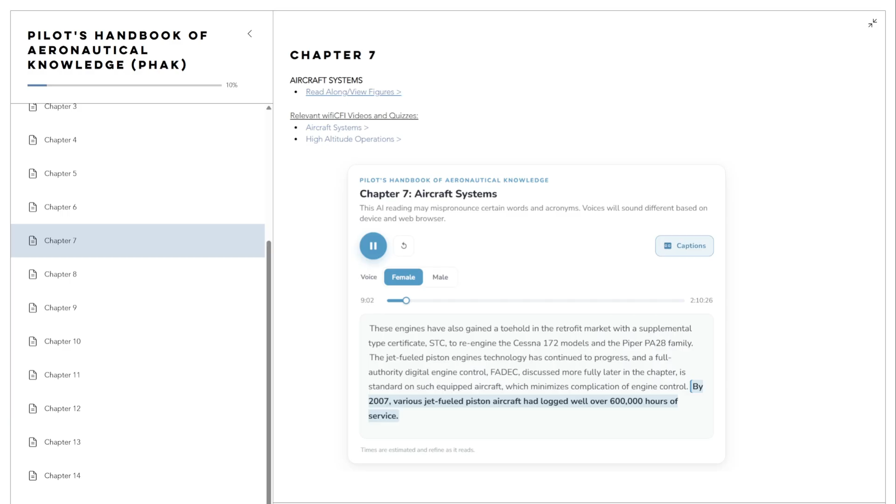Propeller. The propeller is a rotating airfoil, subject to induced drag, stalls, and other aerodynamic principles that apply to any airfoil. It provides the necessary thrust to pull, or in some cases push, the aircraft through the air. The engine power is used to rotate the propeller, which in turn generates thrust very similar to the manner in which a wing produces lift. The amount of thrust produced depends on the shape of the airfoil, the angle of attack, AOA, of the propeller blade, and the revolutions per minute, RPM, of the engine.

The propeller itself is twisted so the blade angle changes from hub to tip. The greatest angle of incidence, or the highest pitch, is at the hub, while the smallest angle of incidence, or smallest pitch, is at the tip. The reason for the twist is to produce uniform lift from the hub to the tip. As the blade rotates, there is a difference in the actual speed of the various portions of the blade. The tip of the blade travels faster than the part near the hub, because the tip travels a greater distance than the hub in the same length of time. Figure 7-7, changing the angle of incidence, pitch, from the hub to the tip to correspond with the speed produces uniform lift throughout the length of the blade.

A propeller blade designed with the same angle of incidence throughout its entire length would be inefficient, because as airspeed increases in flight, the portion near the hub would have a negative AOA, while the blade tip would be stalled. Small aircraft are equipped with either one of two types of propellers, fixed pitch or adjustable pitch.

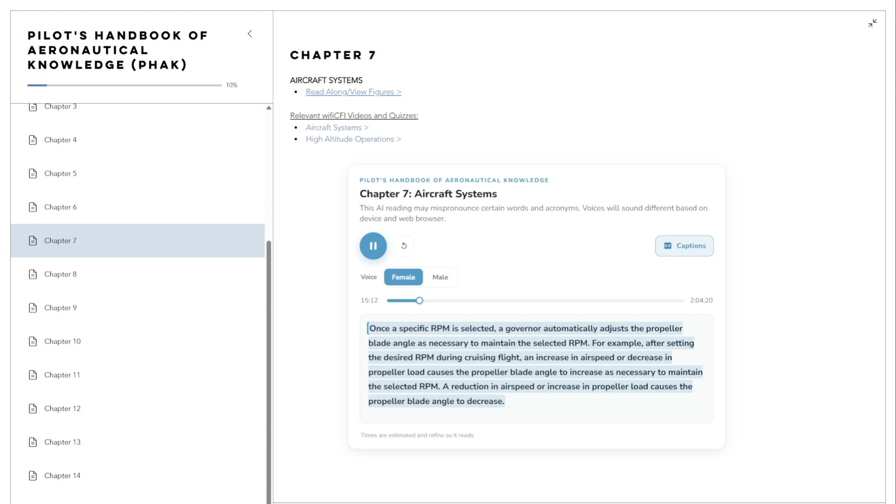The throttle controls power output and the propeller control regulates engine RPM. This regulates propeller RPM, which is registered on the tachometer. Once a specific RPM is selected, a governor automatically adjusts the propeller blade angle as necessary to maintain the selected RPM. For example, after setting the desired RPM during cruising flight, an increase in airspeed or decrease in propeller load causes the propeller blade angle to increase as necessary to maintain the selected RPM. A reduction in airspeed or increase in propeller load causes the propeller blade angle to decrease.

The propeller's constant speed range, defined by the high and low pitch stops, is the range of possible blade angles for a constant speed propeller. As long as the propeller blade angle is within the constant speed range and not against either pitch stop, a constant engine RPM is maintained.

If the propeller blades contact a pitch stop, the engine RPM will increase or decrease as appropriate with changes in airspeed and propeller load. For example, once a specific RPM has been selected, if aircraft speed decreases enough to rotate the propeller blades until they contact the low pitch stop, any further decrease in airspeed will cause engine RPM to decrease the same way as if a fixed pitch propeller were installed.

The same holds true when an aircraft equipped with a constant speed propeller accelerates to a faster airspeed. As the aircraft accelerates, the propeller blade angle increases to maintain the selected RPM until the high pitch stop is reached. Once this occurs, the blade angle cannot increase any further and engine RPM increases.

On aircraft equipped with a constant speed propeller, power output is controlled by the throttle and indicated by a manifold pressure gauge. The gauge measures the absolute pressure of the fuel-air mixture inside the intake manifold and is more correctly a measure of manifold absolute pressure (MAP). At a constant RPM and altitude, the amount of power produced is directly related to the fuel-air mixture being delivered to the combustion chamber. As the throttle setting is increased, more fuel and air flows to the engine and MAP increases.

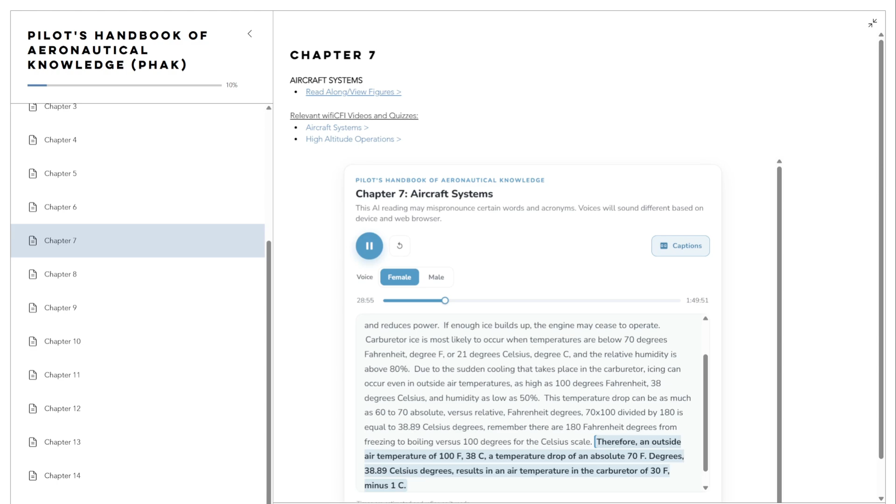This temperature drop can be as much as 60 to 70 absolute, versus relative, Fahrenheit degrees. 70 × 100 / 180 = 38.89 Celsius degrees. Remember there are 180 Fahrenheit degrees from freezing to boiling versus 100 degrees for the Celsius scale. Therefore, an outside air temperature of 100 °F (38 °C) with a temperature drop of an absolute 70 F degrees (38.89 Celsius degrees) results in an air temperature in the carburetor of 30 °F (-1 °C).

The first indication of carburetor icing in an aircraft with a fixed-pitch propeller is a decrease in engine RPM, which may be followed by engine roughness. In an aircraft with a constant speed propeller, carburetor icing is usually indicated by a decrease in manifold pressure, but no reduction in RPM. Propeller pitch is automatically adjusted to compensate for loss of power. Thus, a constant RPM is maintained.

Although carburetor ice can occur during any phase of flight, it is particularly dangerous when using reduced power during a descent. Under certain conditions, carburetor ice could build unnoticed until power is added. To combat the effects of carburetor ice, engines with float-type carburetors employ a carburetor heat system. Carburetor heat.

Carburetor heat is an anti-icing system that preheats the air before it reaches the carburetor and is intended to keep the fuel-air mixture above freezing to prevent the formation of carburetor ice. Carburetor heat can be used to melt ice that has already formed in the carburetor if the accumulation is not too great, but using carburetor heat as a preventative measure is the better option.

Additionally, carburetor heat may be used as an alternate air source if the intake filter clogs, such as in sudden or unexpected airframe icing conditions. The carburetor heat should be checked during the engine run-up. When using carburetor heat, follow the manufacturer's recommendations.

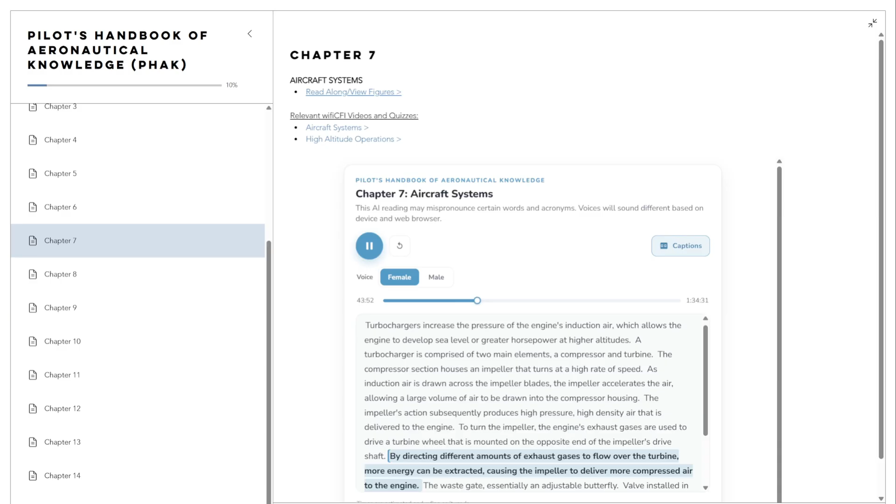To turn the impeller, the engine's exhaust gases are used to drive a turbine wheel that is mounted on the opposite end of the impeller's drive shaft. By directing different amounts of exhaust gases to flow over the turbine, more energy can be extracted, causing the impeller to deliver more compressed air to the engine. The wastegate, essentially an adjustable butterfly valve installed in the exhaust system, is used to vary the mass of exhaust gas flowing into the turbine. When closed, most of the exhaust gases from the engine are forced to flow through the turbine. When open, the exhaust gases are allowed to bypass the turbine by flowing directly out through the engine's exhaust pipe.

Since the temperature of a gas rises when it is compressed, turbocharging causes the temperature of the induction air to increase. To reduce this temperature and lower the risk of detonation, many turbocharged engines use an intercooler. This small heat exchanger uses outside air to cool the hot compressed air before it enters the fuel metering device. System operation. On most modern turbocharged engines, the position of the wastegate is governed by a pressure sensing control mechanism coupled to an actuator.

Engine oil directed into or away from this actuator moves the wastegate position. On these systems, the actuator is automatically positioned to produce the desired MAP simply by changing the position of the throttle control. Other turbocharging system designs use a separate manual control to position the wastegate. With manual control, the manifold pressure gauge must be closely monitored to determine when the desired MAP has been achieved.

Manual systems are often found on aircraft that have been modified with aftermarket turbocharging systems. These systems require special operating considerations. For example, if the wastegate is left closed after descending from a high altitude, it is possible to produce a manifold pressure that exceeds the engine's limitations. This condition, called an overboost, may produce severe detonation because of the leaning effect resulting from increased air density during descent. Although an automatic wastegate system is less likely to experience an overboost condition, it can still occur.

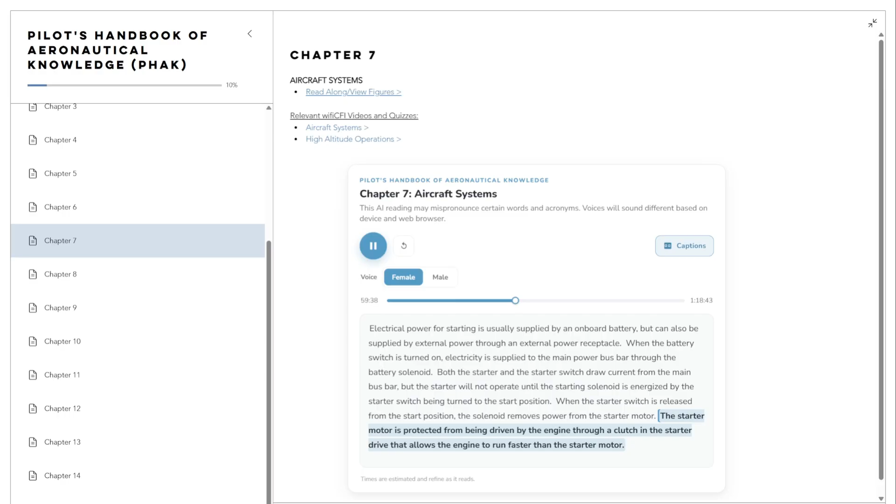When the starter switch is released from the start position, the solenoid removes power from the starter motor. The starter motor is protected from being driven by the engine through a clutch in the starter drive that allows the engine to run faster than the starter motor.

When starting an engine, the rules of safety and courtesy should be strictly observed. One of the most important safety rules is to ensure there is no one near the propeller prior to starting the engine. In addition, the wheels should be chocked and the brakes set to avoid hazards caused by unintentional movement. To avoid damage to the propeller and property, the aircraft should be in an area where the propeller will not stir up gravel or dust.

Combustion. During normal combustion, the fuel-air mixture burns in a very controlled and predictable manner. In a spark ignition engine, the process occurs in a fraction of a second. The mixture actually begins to burn at the point where it is ignited by the spark plugs. It then burns away from the plugs until it is completely consumed. This type of combustion causes a smooth buildup of temperature and pressure and ensures that the expanding gases deliver the maximum force to the piston at exactly the right time in the power stroke.

Figure 7-21. Detonation is an uncontrolled, explosive ignition of the fuel-air mixture within the cylinder's combustion chamber. It causes excessive temperatures and pressures which, if not corrected, can quickly lead to failure of the piston, cylinder, or valves. In less severe cases, detonation causes engine overheating, roughness, or loss of power. Detonation is characterized by high cylinder head temperatures and is most likely to occur when operating at high power settings.

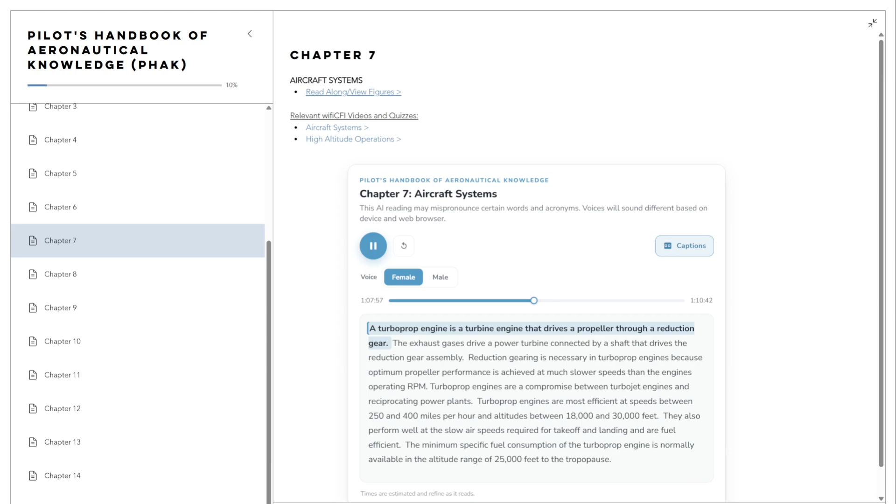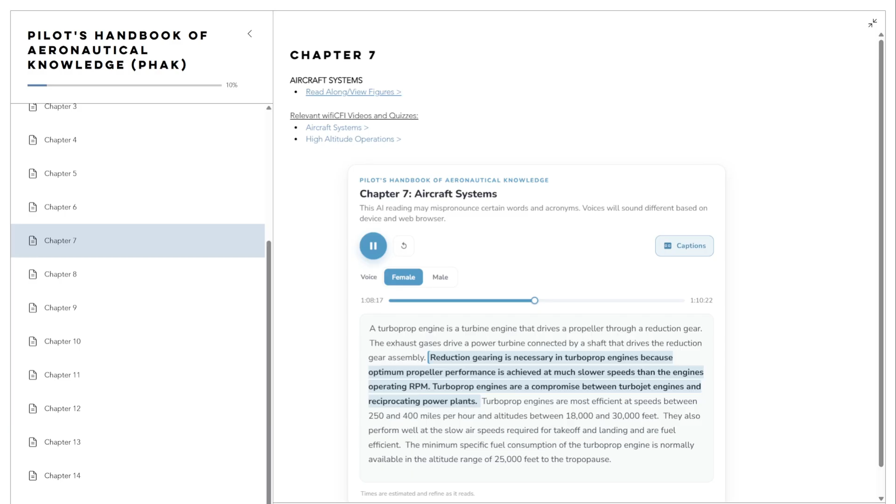Turboprop. A turboprop engine is a turbine engine that drives a propeller through a reduction gear. The exhaust gases drive a power turbine connected by a shaft that drives the reduction gear assembly. Reduction gearing is necessary in turboprop engines because optimum propeller performance is achieved at much slower speeds than the engine's operating RPM. Turboprop engines are a compromise between turbojet engines and reciprocating power plants.

Turboprop engines are most efficient at speeds between 250 and 400 miles per hour and altitudes between 18,000 and 30,000 feet. They also perform well at the slow air speeds required for takeoff and landing and are fuel efficient. The minimum specific fuel consumption of the turboprop engine is normally available in the altitude range of 25,000 feet to the tropopause.

Turbofan. Turbofans were developed to combine some of the best features of the turbojet and the turboprop. Turbofan engines are designed to create additional thrust by diverting a secondary airflow around the combustion chamber. The turbofan bypass air generates increased thrust, cools the engine, and aids in exhaust noise suppression. This provides turbojet-type cruise speed and lower fuel consumption.

The inlet air that passes through a turbofan engine is usually divided into 2 separate streams of air. One stream passes through the engine core, while a second stream bypasses the engine core. It is this bypass stream of air that is responsible for the term bypass engine. A turbofan's bypass ratio refers to the ratio of the mass airflow that passes through the fan divided by the mass airflow that passes through the engine core.

Turboshaft. The fourth common type of jet engine is the turboshaft. As shown in Figure 7-26, it delivers power to a shaft that drives something other than a propeller.

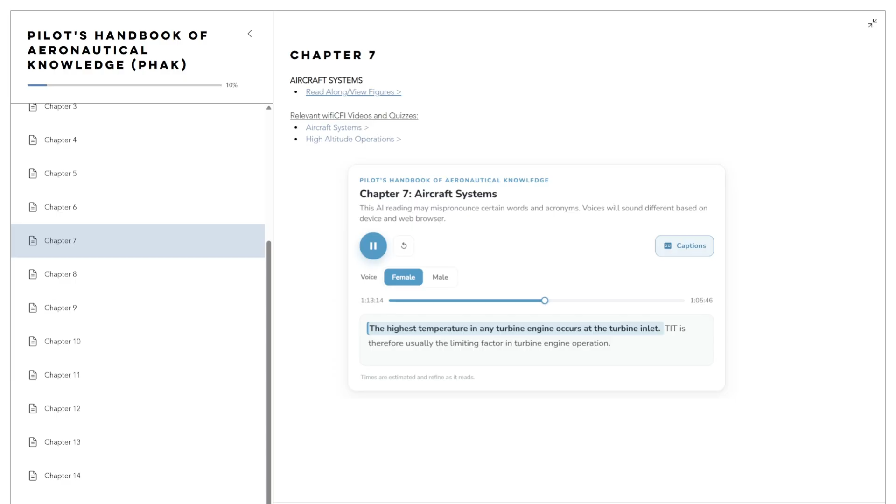Engine temperature limitations. The highest temperature in any turbine engine occurs at the turbine inlet. TIT is therefore usually the limiting factor in turbine engine operation. Turbine engine thrust varies directly with air density. As air density decreases, so does thrust. Additionally, because air density decreases with an increase in temperature, increased temperatures also result in decreased thrust. While both turbine and reciprocating powered engines are affected to some degree by high relative humidity, turbine engines will experience a negligible loss of thrust, while reciprocating engines experience a significant loss of brake horsepower.

Foreign object damage, FOD. Due to the design and function of a turbine engine's air inlet, the possibility of ingestion of debris always exists. This causes significant damage, particularly to the compressor and turbine sections. When ingestion of debris occurs, it is called foreign object damage, FOD. Typical FOD consists of small nicks and dents caused by ingestion of small objects from the ramp, taxiway, or runway, but FOD damage caused by bird strikes or ice ingestion also occurs. Sometimes FOD results in total destruction of an engine.

Prevention of FOD is a high priority. Some engine inlets have a tendency to form a vortex between the ground and the inlet during ground operations. A vortex dissipator may be installed on these engines. Other devices, such as screens and/or deflectors, may also be utilized. Pre-flight procedures include a visual inspection for any sign of FOD.

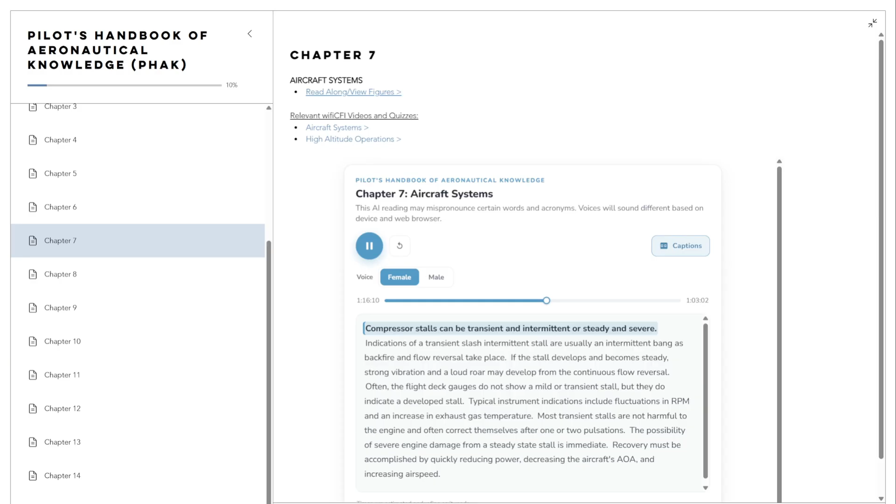Compressor stalls can be transient and intermittent or steady and severe. Indications of a transient/intermittent stall are usually an intermittent bang as backfire and flow reversal take place. If the stall develops and becomes steady, strong vibration and a loud roar may develop from the continuous flow reversal.

Often, the flight deck gauges do not show a mild or transient stall, but they do indicate a developed stall. Typical instrument indications include fluctuations in RPM and an increase in exhaust gas temperature. Most transient stalls are not harmful to the engine and often correct themselves after 1 or 2 pulsations.

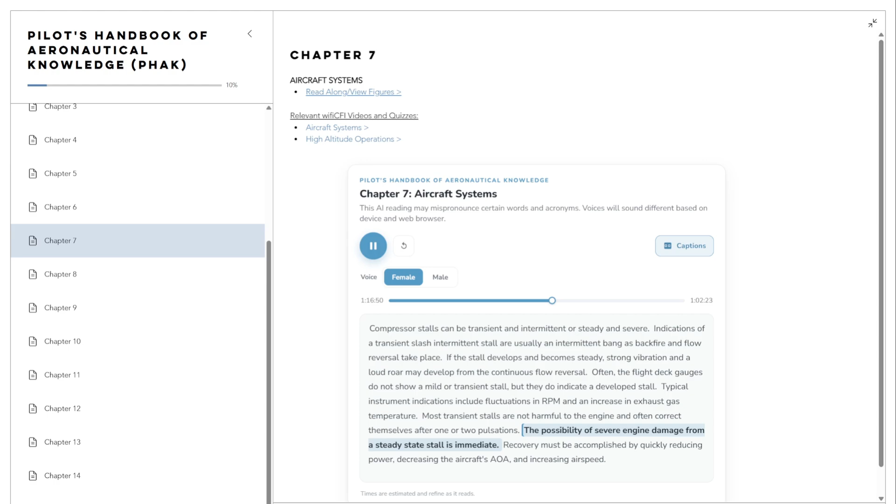The possibility of severe engine damage from a steady-state stall is immediate. Recovery must be accomplished by quickly reducing power, decreasing the aircraft's AOA, and increasing airspeed. Although all gas turbine engines are subject to compressor stalls, most models have systems that inhibit them.

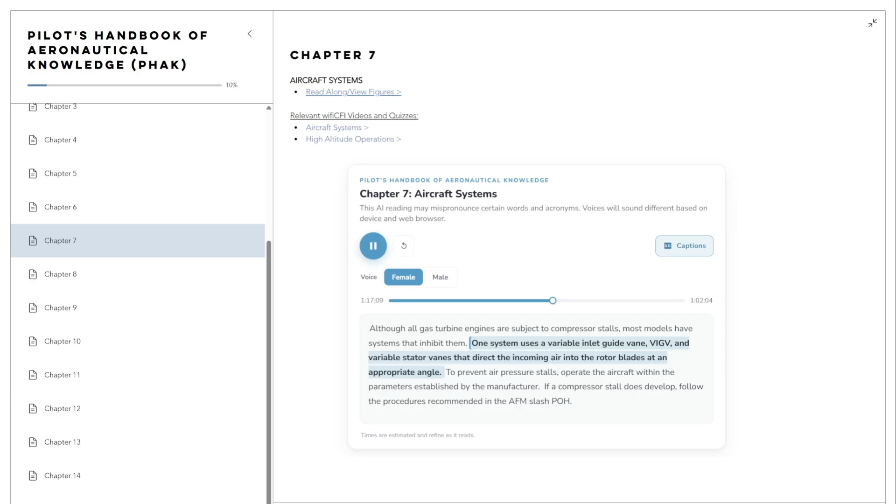One system uses a variable inlet guide vane, VIGV, and variable stator vanes that direct the incoming air into the rotor blades at an appropriate angle. To prevent air pressure stalls, operate the aircraft within the parameters established by the manufacturer. If a compressor stall does develop, follow the procedures recommended in the AFM/POH.

Flameout. A flameout occurs in the operation of a gas turbine engine, in which the fire in the engine unintentionally goes out. If the rich limit of the fuel-air ratio is exceeded in the combustion chamber, the flame will blow out. This condition is often referred to as a rich flameout. It generally results from very fast engine acceleration, where an overly rich mixture causes the fuel temperature to drop below the combustion temperature. It may also be caused by insufficient airflow to support combustion.

A more common flameout occurrence is due to low fuel pressure and low engine speeds, which typically are associated with high-altitude flight. This situation may also occur with the engine throttled back during a descent, which can set up the lean condition flameout. A weak mixture can easily cause the flame to die out, even with a normal airflow through the engine. Any interruption of the fuel supply can result in a flameout. This may be due to prolonged unusual attitudes, a malfunctioning fuel control system, turbulence, icing, or running out of fuel.

Symptoms of a flameout normally are the same as those following an engine failure. If the flameout is due to a transitory condition, such as an imbalance between fuel flow and engine speed, an air start may be attempted once the condition is corrected. In any case, pilots must follow the applicable emergency procedures outlined in the AFM/POH. Generally, these procedures contain recommendations concerning altitude and airspeed, where the air start is most likely to be successful.

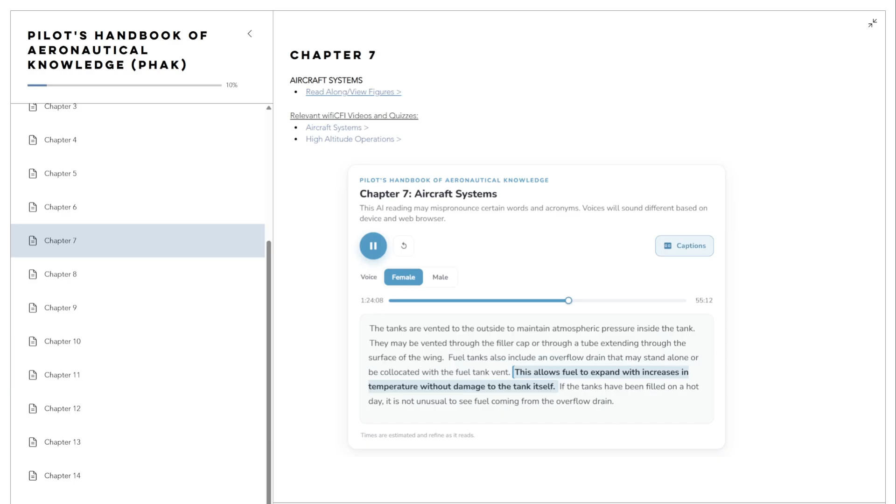Fuel tanks. The fuel tanks, normally located inside the wings of an airplane, have a filler opening on top of the wing through which they can be filled. A filler cap covers this opening. The tanks are vented to the outside to maintain atmospheric pressure inside the tank. They may be vented through the filler cap or through a tube extending through the surface of the wing. Fuel tanks also include an overflow drain that may stand alone or be collocated with the fuel tank vent. This allows fuel to expand with increases in temperature without damage to the tank itself. If the tanks have been filled on a hot day, it is not unusual to see fuel coming from the overflow drain.

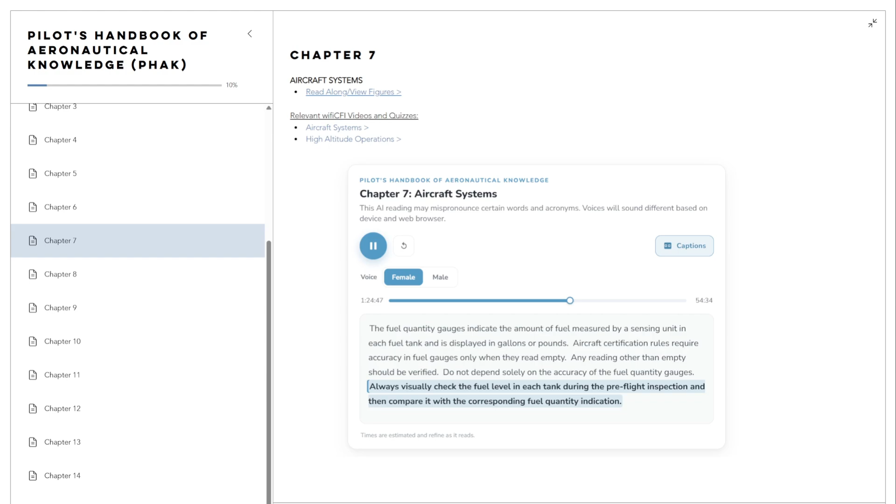Fuel gauges. The fuel quantity gauges indicate the amount of fuel measured by a sensing unit in each fuel tank and is displayed in gallons or pounds. Aircraft certification rules require accuracy in fuel gauges only when they read empty. Any reading other than empty should be verified. Do not depend solely on the accuracy of the fuel quantity gauges. Always visually check the fuel level in each tank during the pre-flight inspection and then compare it with the corresponding fuel quantity indication. If a fuel pump is installed in the fuel system, a fuel pressure gauge is also included.

This gauge indicates the pressure in the fuel lines. The normal operating pressure can be found in the AFM/POH or on the gauge by color coding.

Fuel selectors. The fuel selector valve allows selection of fuel from various tanks. A common type of selector valve contains 4 positions: left, right, both, and off. Selecting the left or right position allows fuel to feed only from the respective tank, while selecting the both position feeds fuel from both tanks. The left or right position may be used to balance the amount of fuel remaining in each wing tank.

Fuel placards show any limitations on fuel tank usage, such as level flight only and/or both for landings and takeoffs. Regardless of the type of fuel selector in use, fuel consumption should be monitored closely to ensure that a tank does not run completely out of fuel. Running a fuel tank dry does not only cause the engine to stop, but running for prolonged periods on one tank causes an unbalanced fuel load between tanks.

Running a tank completely dry may allow air to enter the fuel system and cause vapor lock, which makes it difficult to restart the engine. On fuel-injected engines, the fuel becomes so hot it vaporizes in the fuel line, not allowing fuel to reach the cylinders.

Fuel strainers, sumps, and drains. After leaving the fuel tank and before it enters the carburetor, the fuel passes through a strainer that removes any moisture and other sediments in the system. Since these contaminants are heavier than aviation fuel, they settle in a sump at the bottom of the strainer assembly. A sump is a low point in a fuel system and/or fuel tank. The fuel system may contain a sump, a fuel strainer, and fuel tank drains, which may be collocated.

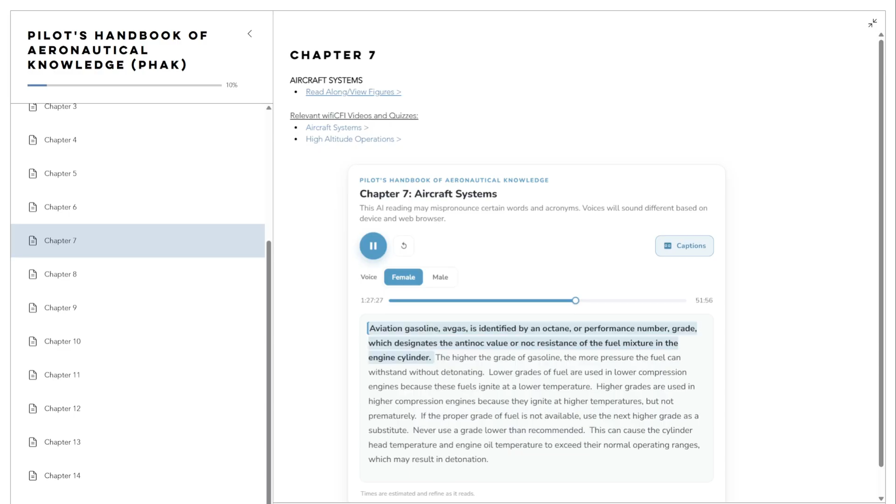Fuel grades. Aviation gasoline, avgas, is identified by an octane, or performance number, grade, which designates the anti-knock value or knock resistance of the fuel mixture in the engine cylinder. The higher the grade of gasoline, the more pressure the fuel can withstand without detonating. Lower grades of fuel are used in lower compression engines because these fuels ignite at a lower temperature. Higher grades are used in higher compression engines because they ignite at higher temperatures, but not prematurely.

If the proper grade of fuel is not available, use the next higher grade as a substitute. Never use a grade lower than recommended. This can cause the cylinder head temperature and engine oil temperature to exceed their normal operating ranges, which may result in detonation. Several grades of avgas are available. Care must be exercised to ensure that the correct aviation grade is being used for the specific type of engine. The proper fuel grade is stated in the AFM/POH, on placards in the flight deck, and next to the filler caps.

Automobile gas should never be used in aircraft engines unless the aircraft has been modified with a Supplemental Type Certificate, STC, issued by the Federal Aviation Administration, FAA. The current method identifies avgas for aircraft with reciprocating engines by the octane and performance number, along with the abbreviation avgas. These aircraft use avgas 80, 100, and 100LL. Although avgas 100LL performs the same as grade 100, the LL indicates it has a low lead content.

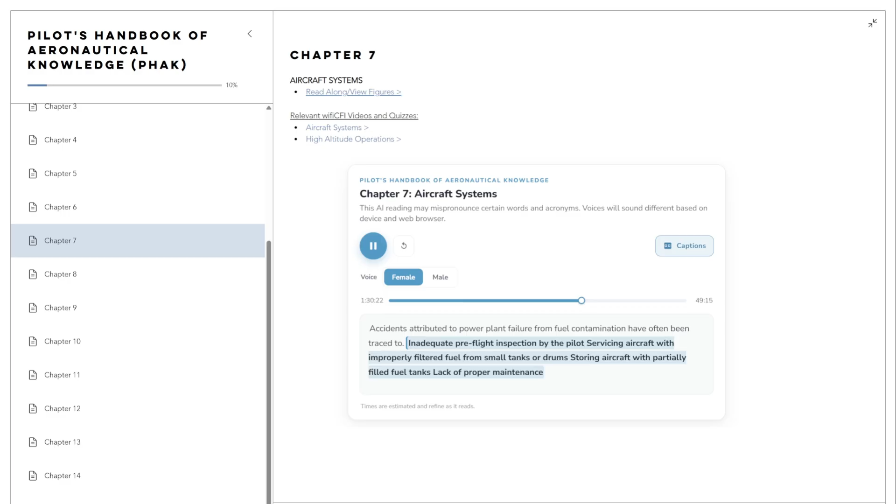Fuel contamination. Accidents attributed to power plant failure from fuel contamination have often been traced to inadequate pre-flight inspection by the pilots, servicing aircraft with improperly filtered fuel from small tanks or drums, storing aircraft with partially filled fuel tanks, and lack of proper maintenance. Fuel should be drained from the fuel strainer quick drain and from each fuel tank sump into a transparent container and then checked for dirt and water.

When the fuel strainer is being drained, water in the tank may not appear until all the fuel has been drained from the lines leading to the tank. This indicates that water remains in the tank and is not forcing the fuel out of the fuel lines leading to the fuel strainer. Therefore, drain enough fuel from the fuel strainer to be certain that fuel is being drained from the tank. The amount depends on the length of fuel line from the tank to the drain. If water or other contaminants are found in the first sample, drain further samples until no trace appears.

Water may also remain in the fuel tanks after the drainage from the fuel strainer has ceased to show any trace of water. This residual water can be removed only by draining the fuel tank sump drains. Water is the principal fuel contaminant. Suspended water droplets in the fuel can be identified by a cloudy appearance of the fuel or by the clear separation of water from the colored fuel, which occurs after the water has settled to the bottom of the tank. As a safety measure, the fuel sump should be drained before every flight during the pre-flight inspection.

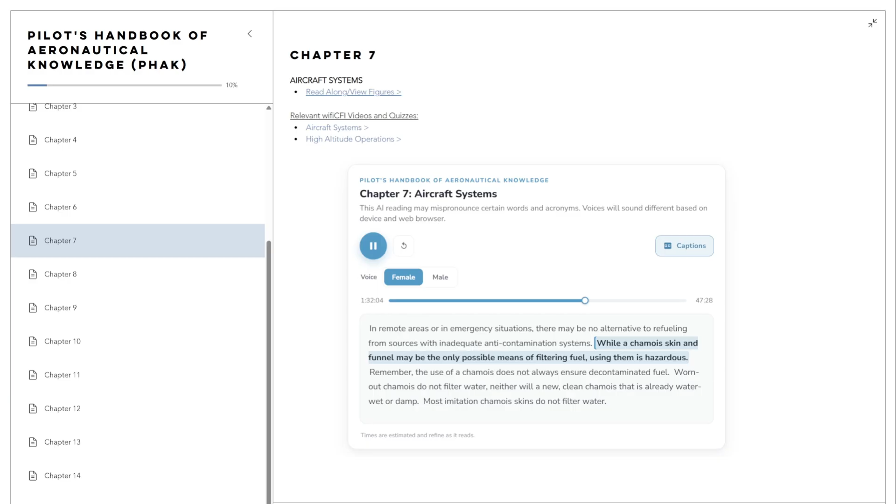Fuel tanks should be filled after each flight or after the last flight of the day to prevent moisture condensation within the tank. To prevent fuel contamination, avoid refueling from cans and drums. In remote areas or in emergency situations, there may be no alternative to refueling from sources with inadequate anti-contamination systems. While a chamois skin and funnel may be the only possible means of filtering fuel, using them is hazardous. Remember, the use of a chamois does not always ensure decontaminated fuel. Worn-out chamois do not filter water, neither will a new, clean chamois that is already water-wet or damp. Most imitation chamois skins do not filter water.

Fuel system icing. Ice formation in the aircraft fuel system results from the presence of water in the fuel system. This water may be undissolved or dissolved. One condition of undissolved water is entrained water that consists of minute water particles suspended in the fuel. This may occur as a result of mechanical agitation of free water or conversion of dissolved water through temperature reduction. Entrained water settles out in time under static conditions and may or may not be drained during normal servicing, depending on the rate at which it is converted to free water. In general, it is not likely that all entrained water can ever be separated from fuel under field conditions.

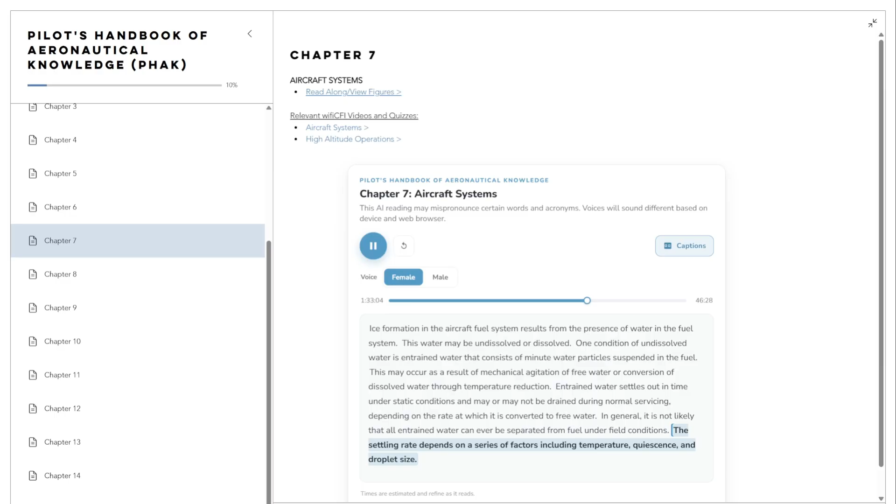The settling rate depends on a series of factors including temperature, quiescence, and droplet size. The droplet size varies depending upon the mechanics of formation. Usually, the particles are so small as to be invisible to the naked eye, but in extreme cases, can cause slight haziness in the fuel. Water in solution cannot be removed except by dehydration or by converting it through temperature reduction to entrained, then to free water. Another condition of undissolved water is free water that may be introduced as a result of refueling or the settling of entrained water that collects at the bottom of a fuel tank.

Free water is usually present in easily detected quantities at the bottom of the tank, separated by a continuous interface from the fuel above. Free water can be drained from a fuel tank through the sump drains, which are provided for that purpose. Free water, frozen on the bottom of reservoirs, such as the fuel tanks and fuel filter, may render water drains useless and can later melt, releasing the water into the system, thereby causing engine malfunction or stoppage. If such a condition is detected, the aircraft may be placed in a warm hangar to re-establish proper draining of these reservoirs, and all sumps and drains should be activated and checked prior to flight.

Entrained water, i.e., water in solution with petroleum fuels, constitutes a relatively small part of the total potential water in a particular system, the quantity dissolved being dependent on fuel temperature and the existing pressure and the water solubility characteristics of the fuel. Entrained water freezes in mid-fuel and tends to stay in suspension longer since the specific gravity of ice is approximately the same as that of AVGAS.

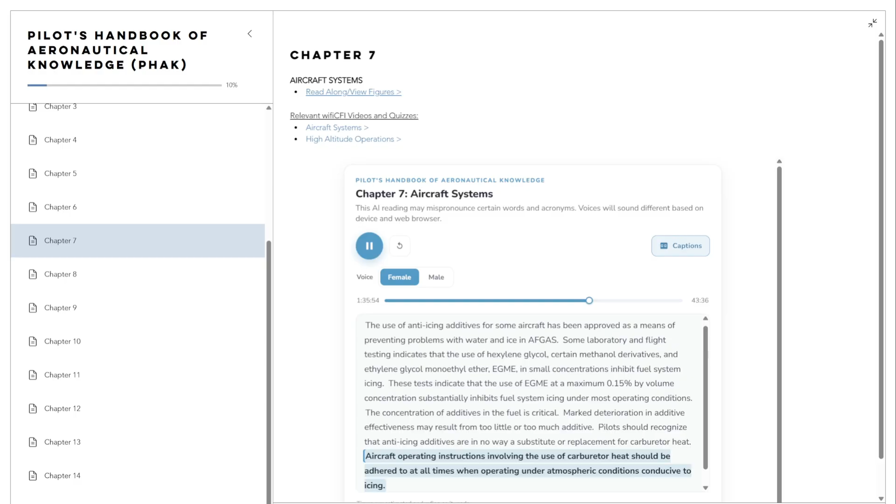Pilots should recognize that anti-icing additives are in no way a substitute or replacement for carburetor heat. Aircraft operating instructions involving the use of carburetor heat should be adhered to at all times when operating under atmospheric conditions conducive to icing.

Refueling procedures. Static electricity is formed by the friction of air passing over the surfaces of an aircraft in flight and by the flow of fuel through the hose and nozzle during refueling. Nylon, Dacron, or wool clothing is especially prone to accumulate and discharge static electricity from the person to the funnel or nozzle. To guard against the possibility of static electricity igniting fuel fumes, a ground wire should be attached to the aircraft before the fuel cap is removed from the tank.

Because both the aircraft and refueler have different static charges, bonding both components to each other is critical. By bonding both components to each other, the static differential charge is equalized. The refueling nozzle should be bonded to the aircraft before refueling begins and should remain bonded throughout the refueling process. When a fuel truck is used, it should be grounded prior to the fuel nozzle contacting the aircraft.

If fueling from drums or cans is necessary, proper bonding and grounding connections are important. Drums should be placed near grounding posts and the following sequence of connections observed. 1. Drum to ground. 2. Ground to aircraft. 3. Drum to aircraft or nozzle to aircraft before removing the fuel cap. When disconnecting, reverse the order.

The passage of fuel through a chamois increases the charge of static electricity and the danger of sparks. The aircraft must be properly grounded and the nozzle, chamois filter, and funnel bonded to the aircraft. If a can is used, it should be connected to either the grounding post or the funnel. Under no circumstances should a plastic bucket or similar non-conductive container be used in this operation.

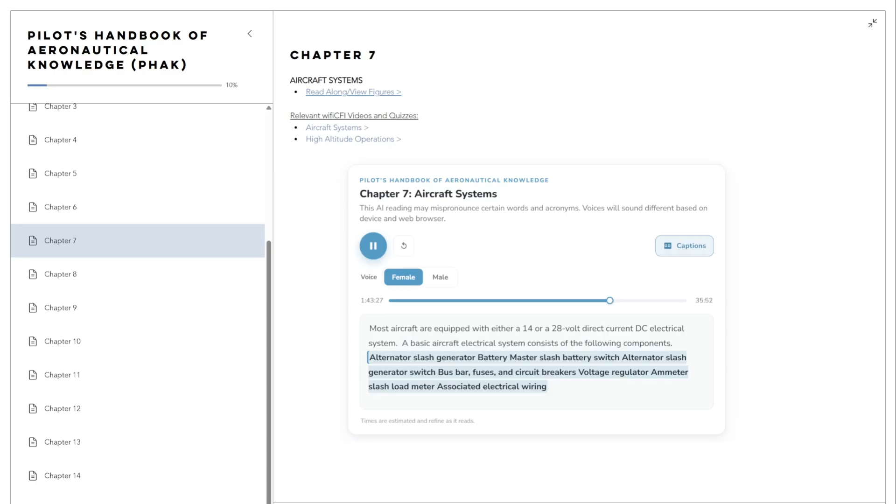Electrical system. Most aircraft are equipped with either a 14 or a 28-volt direct current (DC) electrical system. A basic aircraft electrical system consists of the following components: alternator/generator, battery, master/battery switch, alternator/generator switch, bus bar, fuses, and circuit breakers, voltage regulator, ammeter/load meter, and associated electrical wiring. Engine-driven alternators or generators supply electric current to the electrical system. They also maintain a sufficient electrical charge in the battery.

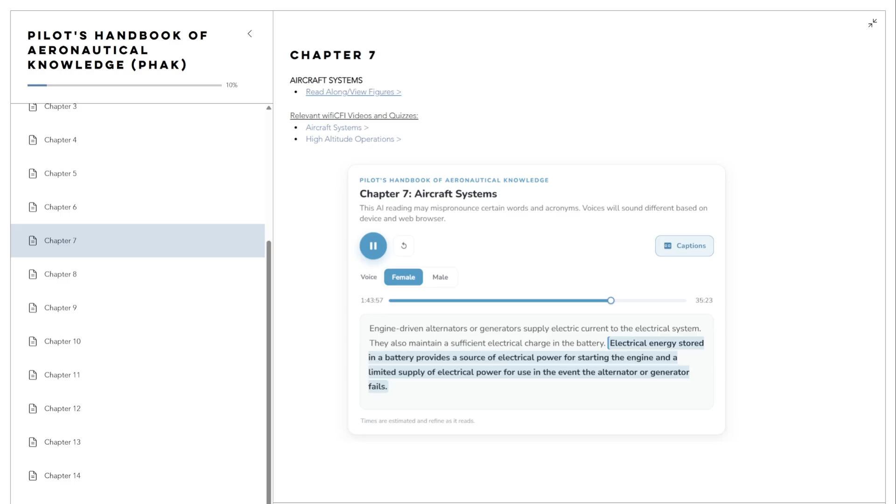Electrical energy stored in a battery provides a source of electrical power for starting the engine and a limited supply of electrical power for use in the event the alternator or generator fails. Most DC generators do not produce a sufficient amount of electrical current at low engine RPM to operate the entire electrical system. During operations at low engine RPM, the electrical needs must be drawn from the battery, which can quickly be depleted. Alternators have several advantages over generators.

Alternators produce sufficient current to operate the entire electrical system, even at slower engine speeds, by producing alternating current, AC, which is converted to DC. The electrical output of an alternator is more constant throughout a wide range of engine speeds.

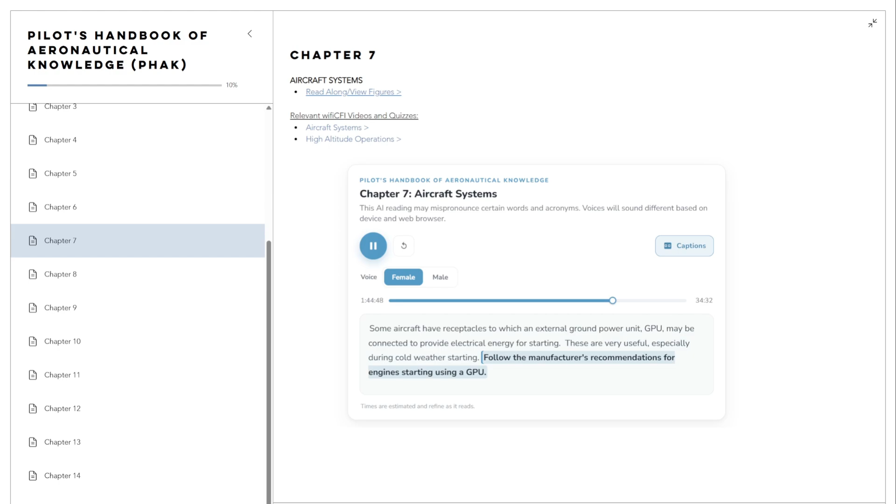Some aircraft have receptacles to which an external ground power unit, GPU, may be connected to provide electrical energy for starting. These are very useful, especially during cold weather starting. Follow the manufacturer's recommendations for engine starting using a GPU.

The electrical system is turned on or off with a master switch. Turning the master switch to the on position provides electrical energy to all the electrical equipment circuits except the ignition system. Equipment that commonly uses the electrical system for its source of energy includes position lights, anti-collision lights, landing lights, taxi lights, interior cabin lights, instrument lights, radio equipment, turn indicator, fuel gauges, electric fuel pump, stall warning system, pitot heat, starting motor.

Many aircraft are equipped with a battery switch that controls the electrical power to the aircraft in a manner similar to the master switch. In addition, an alternator switch is installed that permits the pilot to exclude the alternator from the electrical system in the event of alternator failure. With the alternator half of the switch in the off position, the entire electrical load is placed on the battery. All non-essential electrical equipment should be turned off to conserve battery power.

A bus bar is used as a terminal in the aircraft electrical system to connect the main electrical system to the equipment using electricity as a source of power. This simplifies the wiring system and provides a common point from which voltage can be distributed throughout the system.

Fuses or circuit breakers are used in the electrical system to protect the circuits and equipment from electrical overload. Spare fuses of the proper amperage limit should be carried in the aircraft to replace defective or blown fuses. Circuit breakers have the same function as a fuse but can be manually reset rather than replaced if an overload condition occurs in the electrical system. Placards at the fuse or circuit breaker panel identify the circuit by name and show the amperage limit.

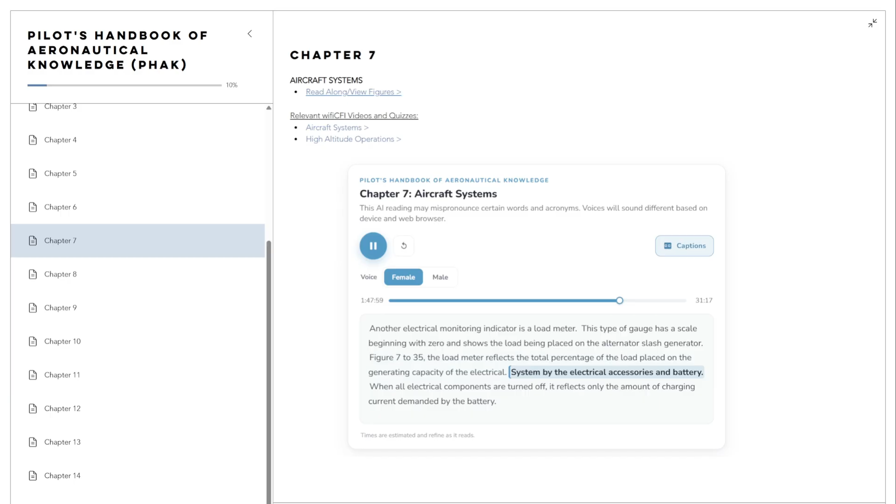Another electrical monitoring indicator is a load meter. This type of gauge has a scale beginning with 0 and shows the load being placed on the alternator/generator. Figure 7-35: the load meter reflects the total percentage of the load placed on the generating capacity of the electrical system by the electrical accessories and battery. When all electrical components are turned off, it reflects only the amount of charging current demanded by the battery.

A voltage regulator controls the rate of charge to the battery by stabilizing the generator or alternator electrical output. The generator/alternator voltage output should be higher than the battery voltage. For example, a 12-volt battery would be fed by a generator/alternator system of approximately 14 volts. The difference in voltage keeps the battery charged.

Hydraulic systems. There are multiple applications for hydraulic use in aircraft, depending on the complexity of the aircraft. For example, a hydraulic system is often used on small airplanes to operate wheel brakes, retractable landing gear, and some constant-speed propellers. On large airplanes, a hydraulic system is used for flight control surfaces, wing flaps, spoilers, and other systems.

A basic hydraulic system consists of a reservoir, pump (either hand, electric, or engine-driven), a filter to keep the fluid clean, a selector valve to control the direction of flow, a relief valve to relieve excess pressure, and an actuator. The hydraulic fluid is pumped through the system to an actuator or servo. A servo is a cylinder with a piston inside that turns fluid power into work and creates the power needed to move an aircraft system or flight control.

Servos can be either single-acting or double-acting, based on the needs of the system. This means that the fluid can be applied to one or both sides of the servo, depending on the servo type. A single-acting servo provides power in one direction. The selector valve allows the fluid direction to be controlled. This is necessary for operations such as the extension and retraction of landing gear, during which the fluid must work in two different directions. The relief valve provides an outlet for the system in the event of excessive fluid pressure in the system. Each system incorporates different components to meet the individual needs of different aircraft.

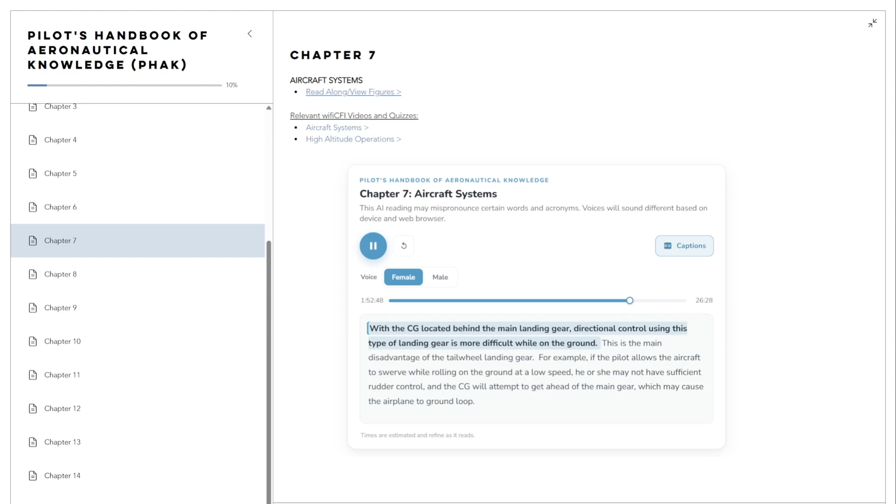Tailwheel landing gear. Tailwheel landing gear airplanes have two main wheels attached to the airframe ahead of its CG that support most of the weight of the structure. A tailwheel at the very back of the fuselage provides a third point of support. This arrangement allows adequate ground clearance for a larger propeller, and is more desirable for operations on unimproved fields. With the CG located behind the main landing gear, directional control using this type of landing gear is more difficult while on the ground. This is the main disadvantage of the tailwheel landing gear.

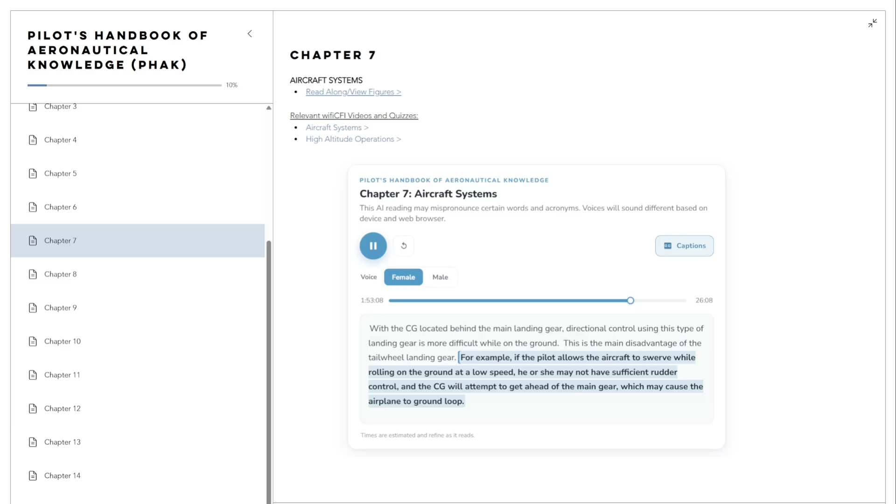For example, if the pilot allows the aircraft to swerve while rolling on the ground at a low speed, he or she may not have sufficient rudder control, and the CG will attempt to get ahead of the main gear, which may cause the airplane to ground loop. Diminished forward visibility when the tailwheel is on or near the ground is a second disadvantage of tailwheel landing gear airplanes. Because of these disadvantages, specific training is required to operate tailwheel airplanes.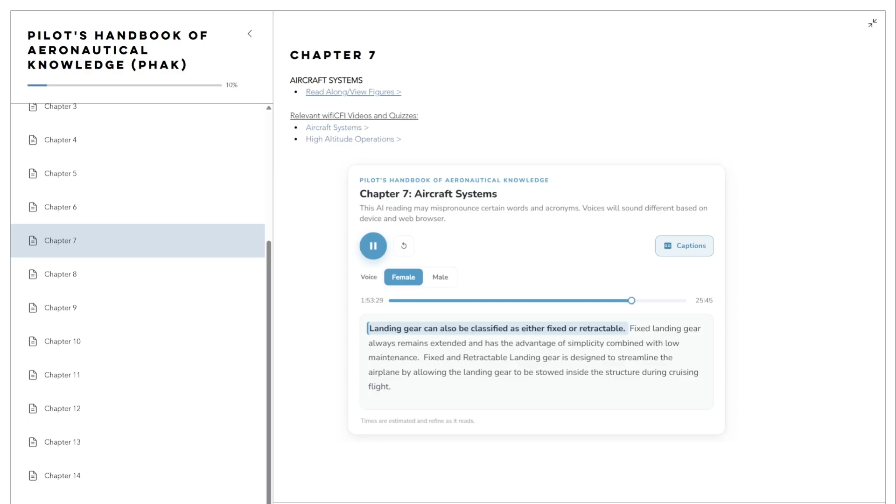Fixed and retractable landing gear. Landing gear can also be classified as either fixed or retractable. Fixed landing gear always remains extended and has the advantage of simplicity combined with low maintenance. Retractable landing gear is designed to streamline the airplane by allowing the landing gear to be stowed inside the structure during cruising flight. Brakes.

Airplane brakes are located on the main wheels and are applied by either a hand control or by foot pedals, toe or heel. Foot pedals operate independently and allow for differential braking. During ground operations, differential braking can supplement nosewheel/tailwheel steering.

Pressurized aircraft. Aircraft are flown at high altitudes for two reasons. First, an aircraft flown at high altitude consumes less fuel for a given airspeed than it does for the same speed at a lower altitude, because the aircraft is more efficient at a high altitude. Second, bad weather and turbulence may be avoided by flying in relatively smooth air above the storms. Many modern aircraft are being designed to operate at high altitudes, taking advantage of that environment.

In order to fly at higher altitudes, the aircraft must be pressurized or suitable supplemental oxygen must be provided for each occupant. It is important for pilots who fly these aircraft to be familiar with the basic operating principles. In a typical pressurization system, the cabin, flight compartment, and baggage compartments are incorporated into a sealed unit capable of containing air under a pressure higher than outside atmospheric pressure.

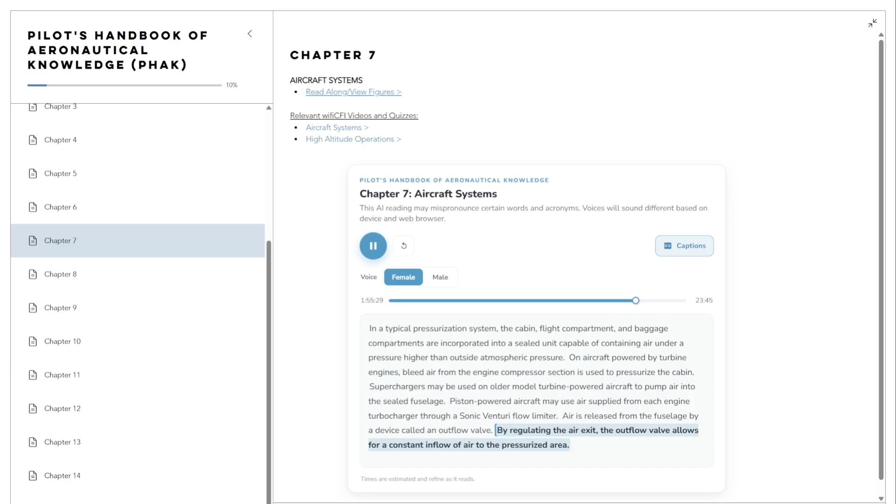A cabin pressurization system typically maintains a cabin pressure altitude of approximately 8,000 feet at the maximum designed cruising altitude of an aircraft. This prevents rapid changes of cabin altitude that may be uncomfortable or cause injury to passengers and crew. In addition, the pressurization system permits a reasonably fast exchange of air from the inside to the outside of the cabin. This is necessary to eliminate odors and to remove stale air.

Pressurization of the aircraft cabin is necessary in order to protect occupants against hypoxia. Within a pressurized cabin, occupants can be transported comfortably and safely for long periods of time, particularly if the cabin altitude is maintained at 8,000 feet or below where the use of oxygen equipment is not required. The flight crew in this type of aircraft must be aware of the danger of accidental loss of cabin pressure and be prepared to deal with such an emergency whenever it occurs.

The following terms will aid in understanding the operating principles of pressurization and air conditioning systems. Aircraft altitude: the actual height above sea level at which the aircraft is flying. Ambient temperature: the temperature in the area immediately surrounding the aircraft. Ambient pressure: the pressure in the area immediately surrounding the aircraft. Cabin altitude: cabin pressure in terms of equivalent altitude above sea level.

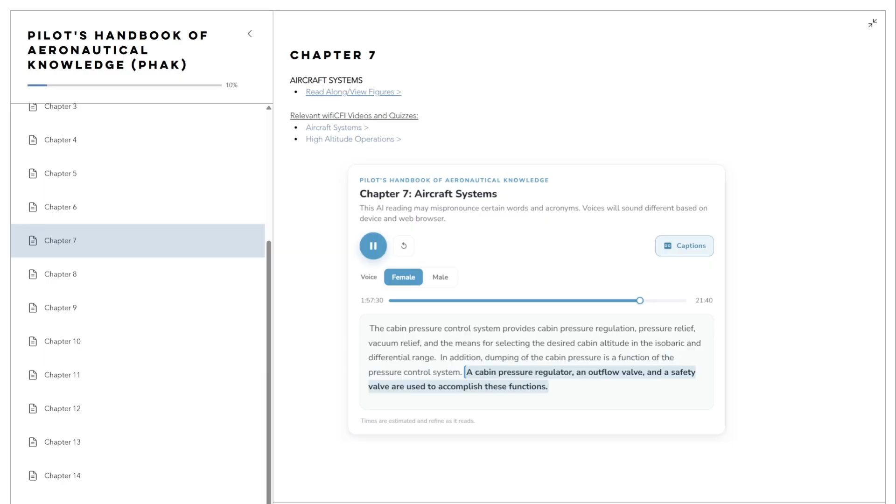Differential pressure: the difference in pressure between the pressure acting on one side of a wall and the pressure acting on the other side of the wall. In aircraft air conditioning and pressurizing systems, it is the difference between cabin pressure and atmospheric pressure. The cabin pressure control system provides cabin pressure regulation, pressure relief, vacuum relief, and the means for selecting the desired cabin altitude in the isobaric and differential range. In addition, dumping of the cabin pressure is a function of the pressure control system. A cabin pressure regulator, an outflow valve, and a safety valve are used to accomplish these functions.

The cabin pressure regulator controls cabin pressure to a selected value in the isobaric range and limits cabin pressure to a preset differential value in the differential range. When an aircraft reaches the altitude at which the difference between the pressure inside and outside the cabin is equal to the highest differential pressure for which the fuselage structure is designed, a further increase in aircraft altitude will result in a corresponding increase in cabin altitude.

Differential control is used to prevent the maximum differential pressure for which the fuselage was designed from being exceeded. This differential pressure is determined by the structural strength of the cabin and often by the relationship of the cabin size to the probable areas of rupture, such as window areas and doors.

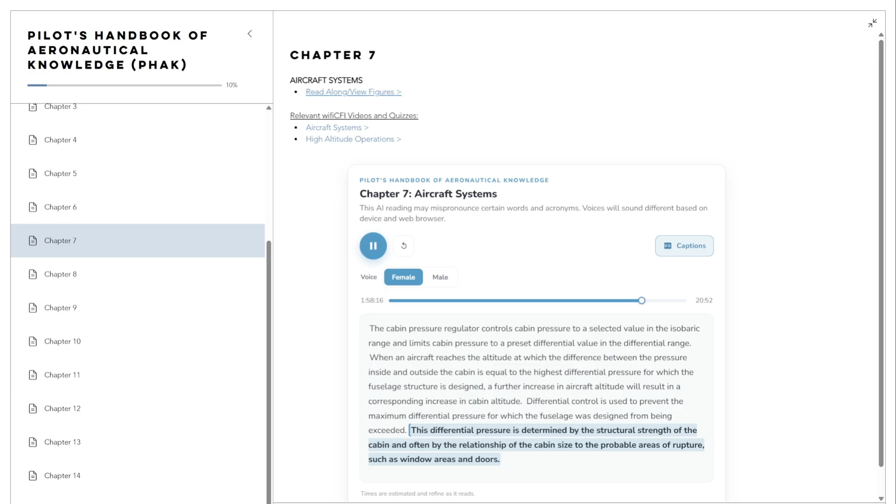The cabin air pressure safety valve is a combination pressure relief, vacuum relief, and dump valve. The pressure relief valve prevents cabin pressure from exceeding a predetermined differential pressure above ambient pressure. The vacuum relief prevents ambient pressure from exceeding cabin pressure by allowing external air to enter the cabin when ambient pressure exceeds cabin pressure. The flight deck control switch actuates the dump valve.

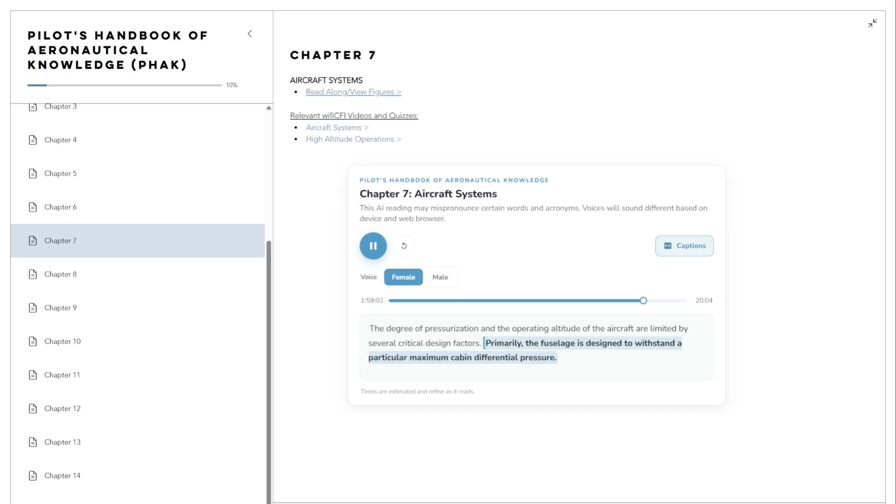When this switch is positioned to ram, a solenoid valve opens, causing the valve to dump cabin air into the atmosphere. The degree of pressurization and the operating altitude of the aircraft are limited by several critical design factors. Primarily, the fuselage is designed to withstand a particular maximum cabin differential pressure.

Several instruments are used in conjunction with the pressurization controller. The cabin differential pressure gauge indicates the difference between inside and outside pressure. This gauge should be monitored to assure that the cabin does not exceed the maximum allowable differential pressure. A cabin altimeter is also provided as a check on the performance of the system. In some cases, these two instruments are combined into one. A third instrument indicates the cabin rate of climb or descent. A cabin rate of climb instrument and a cabin altimeter are illustrated in Figure 7-42.

Decompression is defined as the inability of the aircraft's pressurization system to maintain its designed pressure differential. This can be caused by a malfunction in the pressurization system or structural damage to the aircraft. Physiologically, decompressions fall into the following two categories. During an explosive decompression, there may be noise and one may feel dazed for a moment. The cabin air fills with fog, dust, or flying debris. Fog occurs due to the rapid drop in temperature and the change of relative humidity. Normally, the ears clear automatically. Air rushes from the mouth and nose due to the escape of air from the lungs and may be noticed by some individuals.

Rapid decompression decreases the period of useful consciousness because oxygen in the lungs is exhaled rapidly, reducing pressure on the body. This decreases the partial pressure of oxygen in the blood and reduces the pilot's effective performance time by 1/3 to 1/4 its normal time. For this reason, an oxygen mask should be worn when flying at very high altitudes, 35,000 feet or higher. It is recommended that the crew members select the 100% oxygen setting on the oxygen regulator at high altitude if the aircraft is equipped with a demand or pressure demand oxygen system.

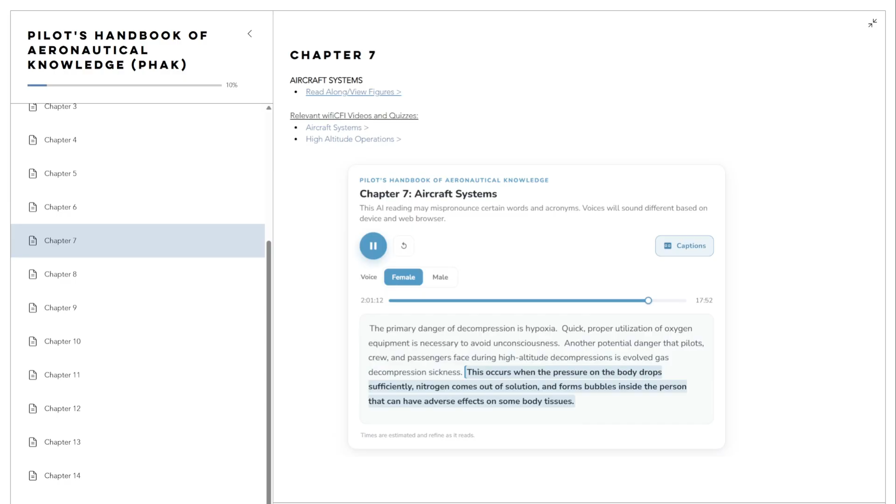The primary danger of decompression is hypoxia. Quick, proper utilization of oxygen equipment is necessary to avoid unconsciousness. Another potential danger that pilots, crew, and passengers face during high-altitude decompressions is evolved gas decompression sickness. This occurs when the pressure on the body drops sufficiently, nitrogen comes out of solution, and forms bubbles inside the person that can have adverse effects on some body tissues.

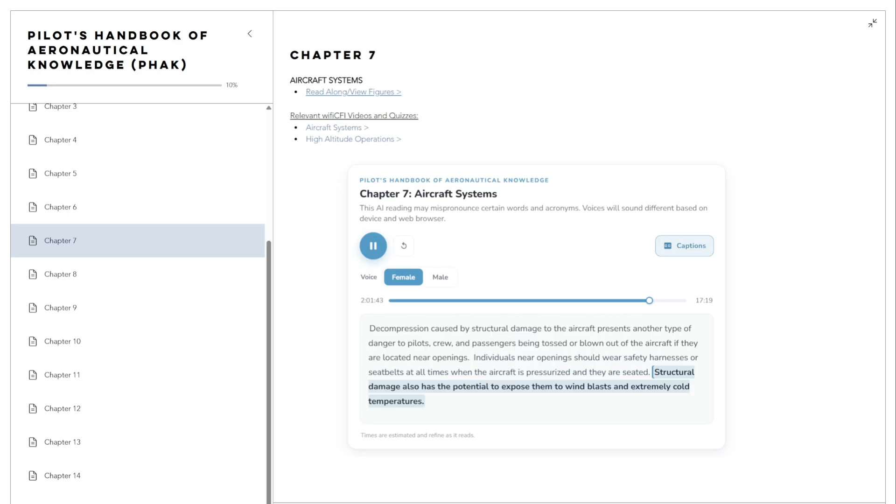Decompression caused by structural damage to the aircraft presents another type of danger to pilots, crew, and passengers: being tossed or blown out of the aircraft if they are located near openings. Individuals near openings should wear safety harnesses or seatbelts at all times when the aircraft is pressurized and they are seated. Structural damage also has the potential to expose them to wind blasts and extremely cold temperatures. Rapid descent from altitude is necessary in order to minimize these problems. Automatic visual and aural warning systems are included in the equipment of all pressurized aircraft.

Oxygen systems. Crew and passengers use oxygen systems in conjunction with pressurization systems to prevent hypoxia. Regulations require, at a minimum, flight crews have and use supplemental oxygen after 30 minutes exposure to cabin pressure altitudes between 12,500 and 14,000 feet. Use of supplemental oxygen is required immediately upon exposure to cabin pressure altitudes above 14,000 feet. Every aircraft occupant above 15,000 feet cabin pressure altitude must have supplemental oxygen.

However, based on a person's physical characteristics and condition, a person may feel the effects of oxygen deprivation at much lower altitudes. Some people flying above 10,000 feet during the day may experience disorientation due to the lack of adequate oxygen. At night, especially when fatigued, these effects may occur as low as 5,000 feet. Therefore, for optimum protection, pilots are encouraged to use supplemental oxygen above 10,000 feet cabin altitude during the day and above 5,000 feet at night.

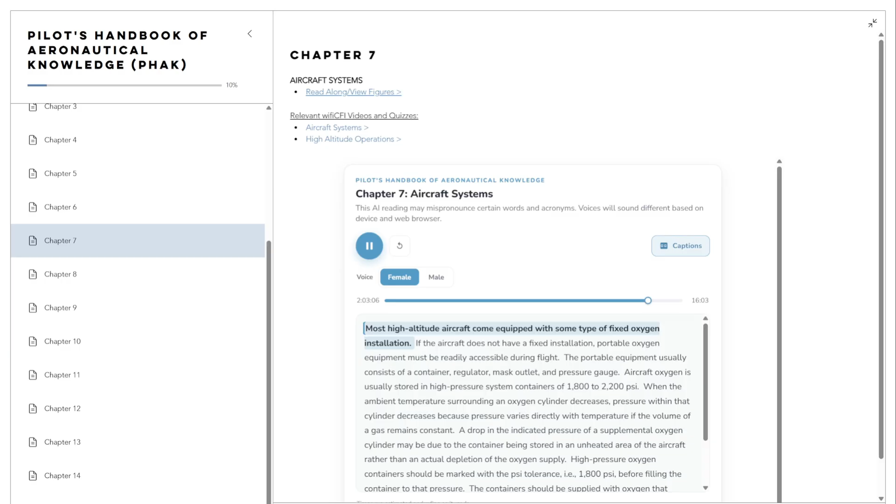Most high-altitude aircraft come equipped with some type of fixed oxygen installation. If the aircraft does not have a fixed installation, portable oxygen equipment must be readily accessible during flight. The portable equipment usually consists of a container, regulator, mask outlet, and pressure gauge. Aircraft oxygen is usually stored in high-pressure system containers of 1,800 to 2,200 psi. When the ambient temperature surrounding an oxygen cylinder decreases, pressure within that cylinder decreases because pressure varies directly with temperature if the volume of a gas remains constant.

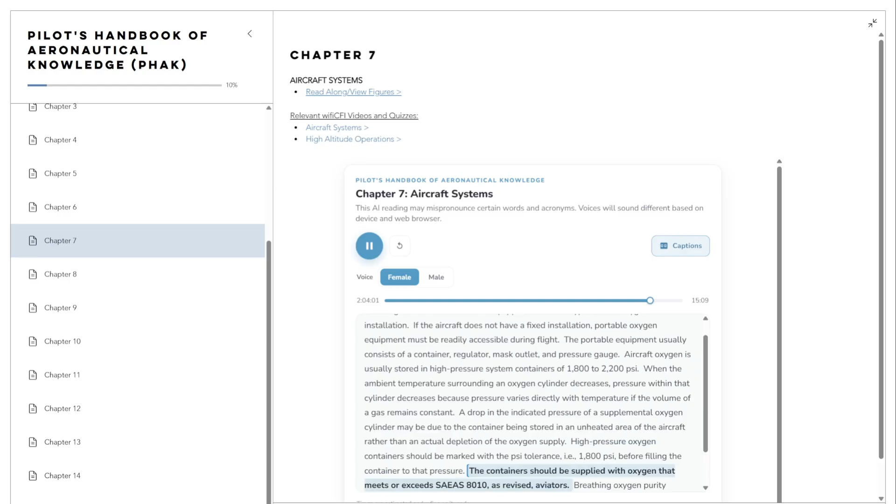A drop in the indicated pressure of a supplemental oxygen cylinder may be due to the container being stored in an unheated area of the aircraft rather than an actual depletion of the oxygen supply. High-pressure oxygen containers should be marked with the psi tolerance, i.e., 1800 psi, before filling the container to that pressure. The containers should be supplied with oxygen that meets or exceeds SAE AS8010, as revised, Aviator's Breathing Oxygen Purity Standard. To assure safety, periodic inspection and servicing of the oxygen system should be performed. An oxygen system consists of a mask or cannula and a regulator that supplies a flow of oxygen dependent upon cabin altitude.

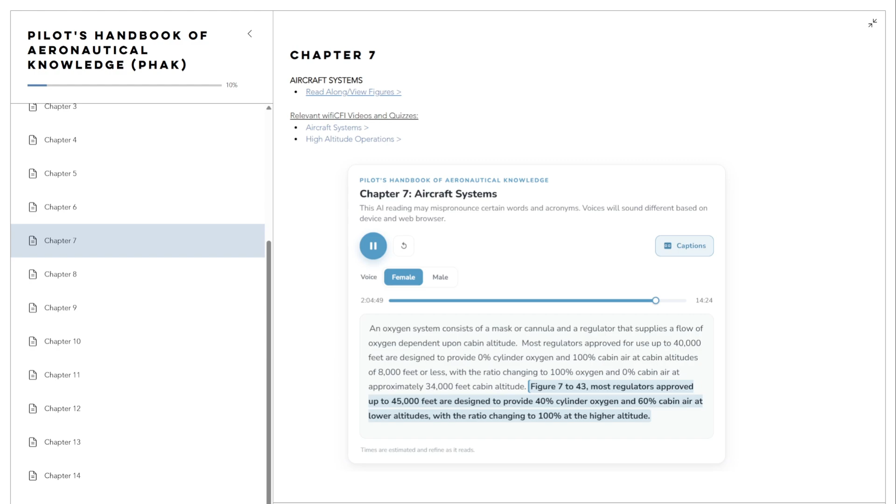Most regulators approved for use up to 40,000 feet are designed to provide 0% cylinder oxygen and 100% cabin air at cabin altitudes of 8,000 feet or less, with the ratio changing to 100% oxygen and 0% cabin air at approximately 34,000 feet cabin altitude. Figure 7-43, most regulators approved up to 45,000 feet are designed to provide 40% cylinder oxygen and 60% cabin air at lower altitudes, with the ratio changing to 100% at the higher altitude.

Pilots should be aware of the danger of fire when using oxygen. Materials that are nearly fireproof in ordinary air may be susceptible to combustion in oxygen. Oils and greases may ignite if exposed to oxygen and cannot be used for sealing the valves and fittings of oxygen equipment. Smoking during any kind of oxygen equipment use is prohibited.

Before each flight, the pilot should thoroughly inspect and test all oxygen equipment. The inspection should include a thorough examination of the aircraft oxygen equipment, including available supply, an operational check of the system, and assurance that the supplemental oxygen is readily accessible.

The inspection should be accomplished with clean hands and should include a visual inspection of the mask and tubing for tears, cracks, or deterioration, the regulator for valve and lever condition and positions, oxygen quantity, and the location and functioning of oxygen pressure gauges, flow indicators, and connections. The mask should be donned and the system should be tested. After any oxygen use, verify that all components and valves are shut off.

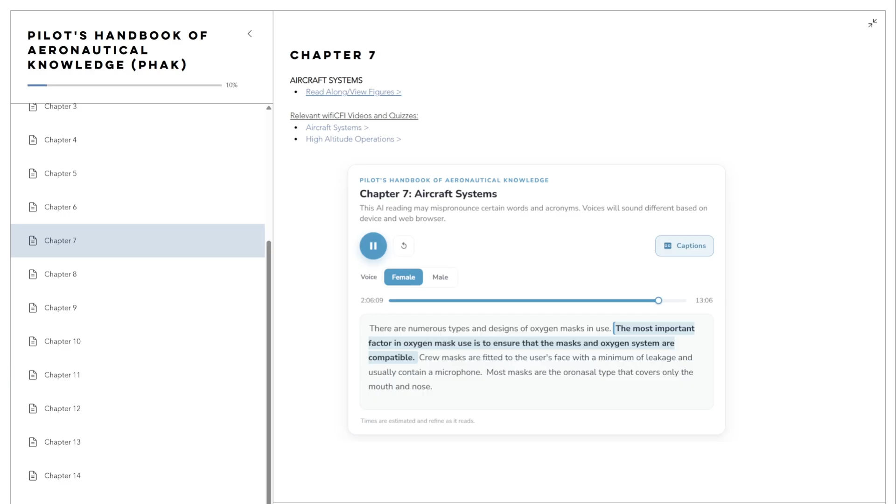Oxygen masks. There are numerous types and designs of oxygen masks in use. The most important factor in oxygen mask use is to ensure that the masks and oxygen system are compatible. Crew masks are fitted to the user's face with a minimum of leakage and usually contain a microphone. Most masks are the oronasal type that covers only the mouth and nose. A passenger mask may be a simple, cup-shaped rubber molding sufficiently flexible to obviate individual fitting. It may have a simple elastic head strap, or the passenger may hold it to his or her face.

All oxygen masks should be kept clean to reduce the danger of infection and prolong the life of the mask. To clean the mask, wash it with a mild soap and water solution and rinse it with clear water. If a microphone is installed, use a clean swab, instead of running water, to wipe off the soapy solution. The mask should also be disinfected. A gauze pad that has been soaked in a water solution of merthiolate can be used to swab out the mask. The solution used should contain 1/5 teaspoon of merthiolate per quart of water. Wipe the mask with a clean cloth and air dry.

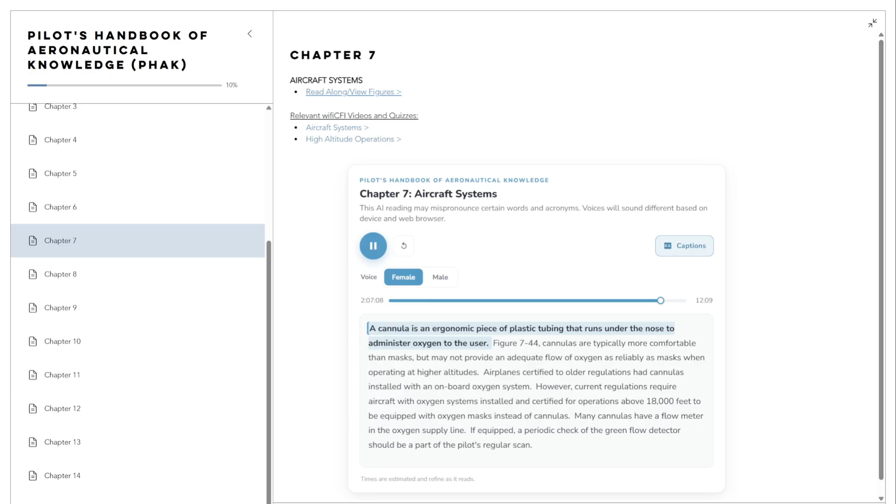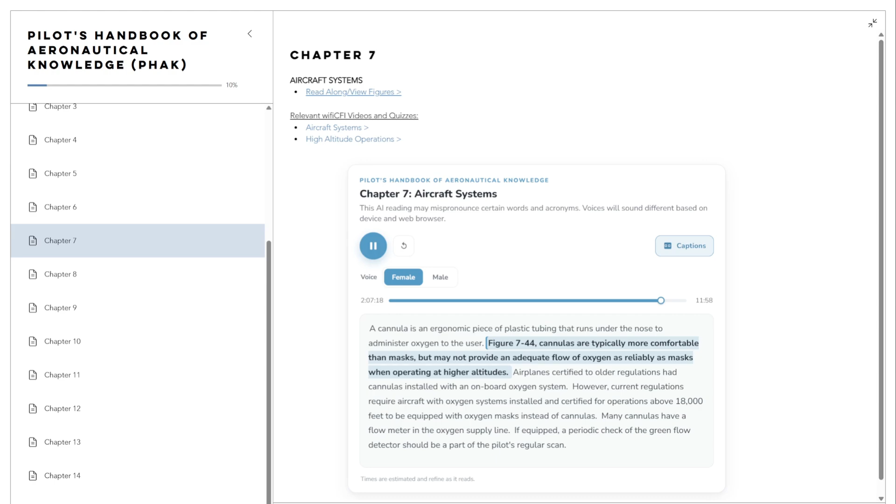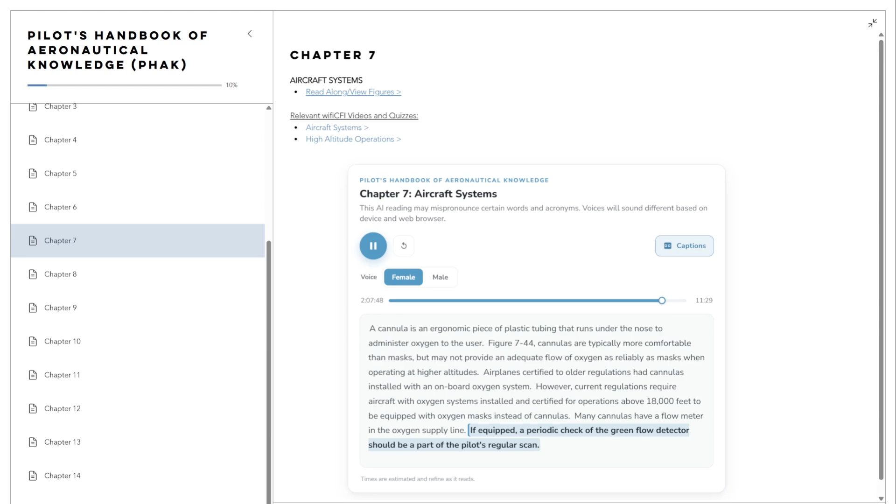Cannula. A cannula is an ergonomic piece of plastic tubing that runs under the nose to administer oxygen to the user. Figure 7-44, cannulas are typically more comfortable than masks, but may not provide an adequate flow of oxygen as reliably as masks when operating at higher altitudes. Airplanes certified to older regulations had cannulas installed with an onboard oxygen system. However, current regulations require aircraft with oxygen systems installed and certified for operations above 18,000 feet to be equipped with oxygen masks instead of cannulas. Many cannulas have a flow meter in the oxygen supply line. If equipped, a periodic check of the green flow detector should be a part of the pilot's regular scan.

Diluter demand oxygen systems. Diluter demand oxygen systems supply oxygen only when the user inhales through the mask. An auto mix lever allows the regulators to automatically mix cabin air and oxygen or supply 100% oxygen, depending on the altitude. The demand mask provides a tight seal over the face to prevent dilution with outside air and can be used safely up to 40,000 feet. A pilot who has a beard or moustache should be sure it is trimmed in a manner that will not interfere with the sealing of the oxygen mask. The fit of the mask around the beard or moustache should be checked on the ground for proper sealing.

Pressure demand oxygen systems. Pressure demand oxygen systems are similar to diluter demand oxygen equipment, except that oxygen is supplied to the mask under pressure at cabin altitudes above 34,000 feet. Pressure demand regulators create airtight and oxygen-tight seals, but they also provide a positive pressure application of oxygen to the mask face piece that allows the user's lungs to be pressurized with oxygen. This feature makes pressure demand regulators safe at altitudes above 40,000 feet. Some systems may have a pressure demand mask with the regulator attached directly to the mask, rather than mounted on the instrument panel or other area within the flight deck.

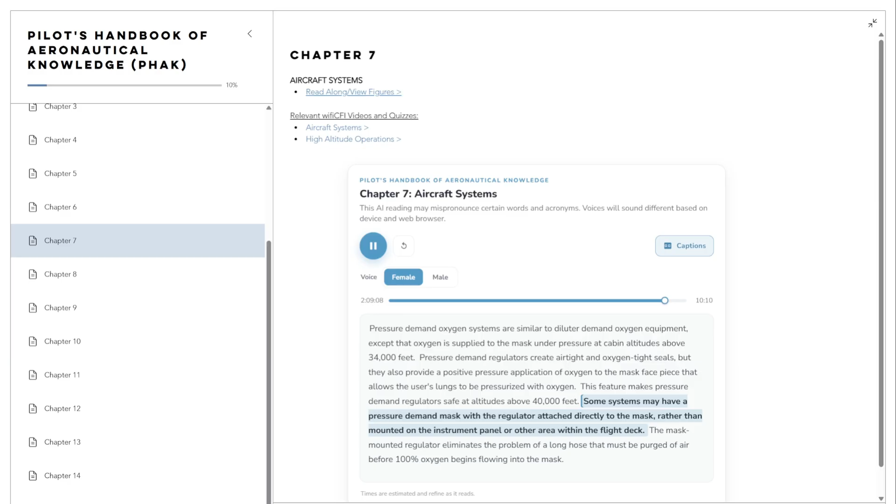The mask-mounted regulator eliminates the problem of a long hose that must be purged of air before 100% oxygen begins flowing into the mask.

Continuous flow oxygen system. Continuous flow oxygen systems are usually provided for passengers. The passenger mask typically has a reservoir bag that collects oxygen from the continuous flow oxygen system during the time when the mask user is exhaling. The oxygen collected in the reservoir bag allows a higher inspiratory flow rate during the inhalation cycle, which reduces the amount of air dilution. Ambient air is added to the supplied oxygen during inhalation after the reservoir bag oxygen supply is depleted. The exhaled air is released to the cabin.

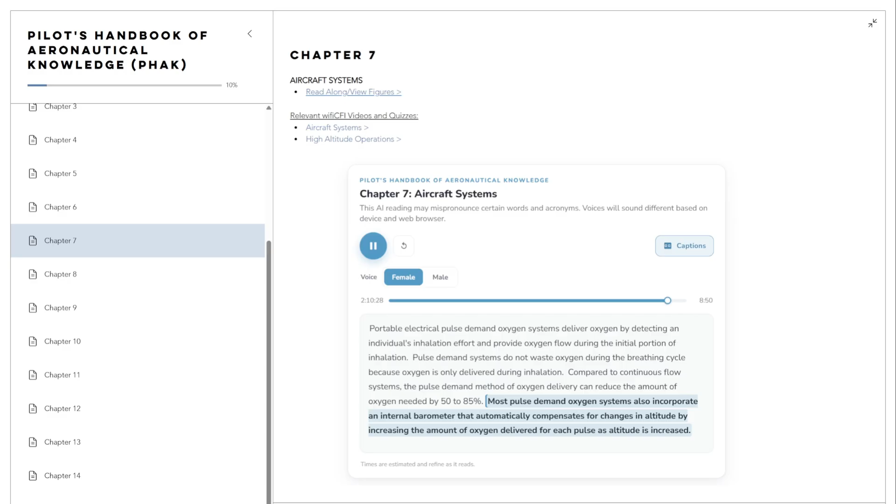Electrical pulse demand oxygen system. Portable electrical pulse demand oxygen systems deliver oxygen by detecting an individual's inhalation effort and provide oxygen flow during the initial portion of inhalation. Pulse demand systems do not waste oxygen during the breathing cycle because oxygen is only delivered during inhalation. Compared to continuous flow systems, the pulse demand method of oxygen delivery can reduce the amount of oxygen needed by 50 to 85%. Most pulse demand oxygen systems also incorporate an internal barometer that automatically compensates for changes in altitude by increasing the amount of oxygen delivered for each pulse as altitude is increased.

Pulse oximeters. A pulse oximeter is a device that measures the amount of oxygen in an individual's blood in addition to heart rate. This non-invasive device measures the color changes that red blood cells undergo when they become saturated with oxygen. By transmitting a special light beam through a fingertip to evaluate the color of the red cells, a pulse oximeter can calculate the degree of oxygen saturation within 1% of directly measured blood oxygen.

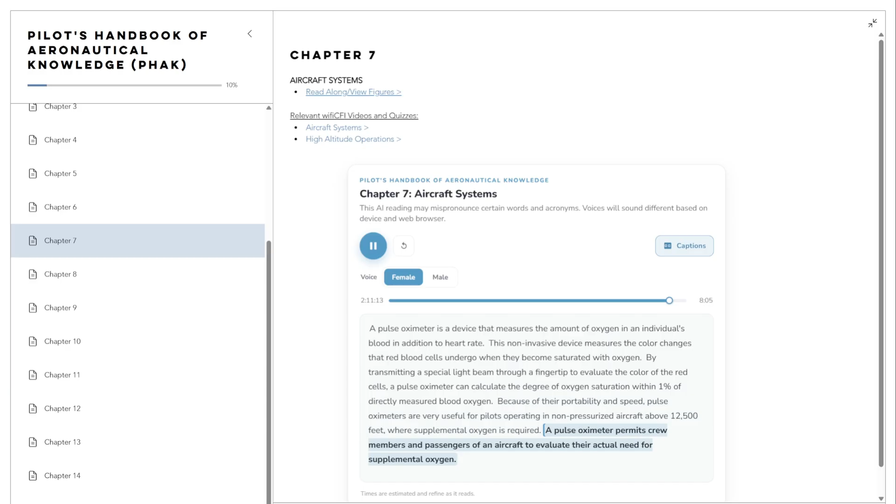Because of their portability and speed, pulse oximeters are very useful for pilots operating in non-pressurized aircraft above 12,500 feet, where supplemental oxygen is required. A pulse oximeter permits crew members and passengers of an aircraft to evaluate their actual need for supplemental oxygen.

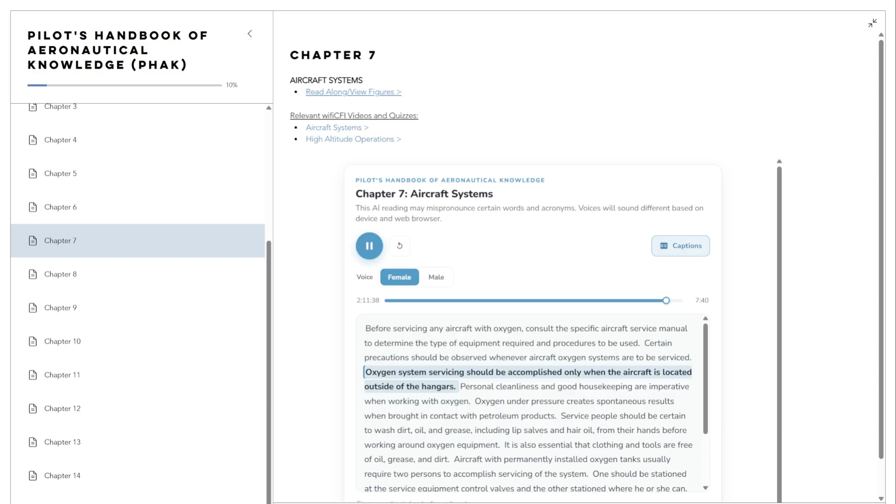Servicing of oxygen systems. Before servicing any aircraft with oxygen, consult the specific aircraft service manual to determine the type of equipment required and procedures to be used. Certain precautions should be observed whenever aircraft oxygen systems are to be serviced. Oxygen system servicing should be accomplished only when the aircraft is located outside of the hangars. Personal cleanliness and good housekeeping are imperative when working with oxygen. Oxygen under pressure creates spontaneous results when brought in contact with petroleum products.

Service people should be certain to wash dirt, oil, and grease, including lip salves and hair oil, from their hands before working around oxygen equipment. It is also essential that clothing and tools are free of oil, grease, and dirt. Aircraft with permanently installed oxygen tanks usually require two persons to accomplish servicing of the system. One should be stationed at the service equipment control valves and the other stationed where he or she can observe the aircraft system pressure gauges. Oxygen system servicing is not recommended during aircraft fueling operations or while other work is performed that could provide a source of ignition. Oxygen system servicing while passengers are on board the aircraft is not recommended.

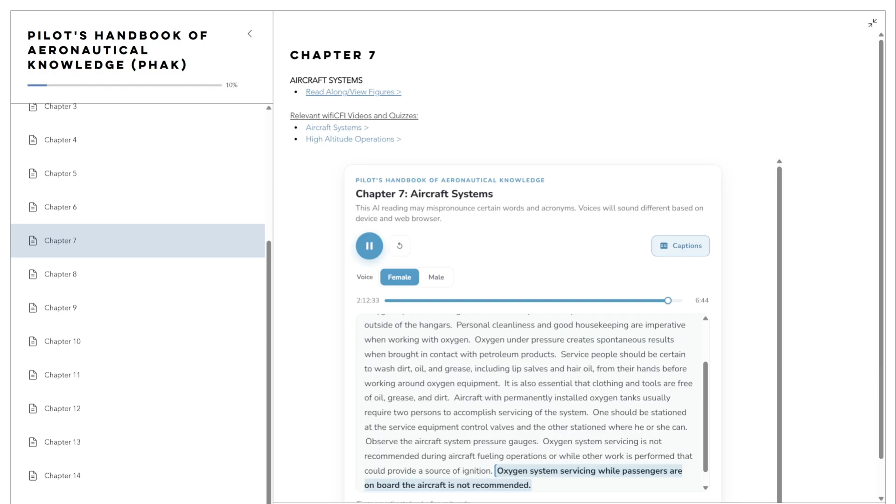Anti-ice and de-ice systems. Anti-icing equipment is designed to prevent the formation of ice, while de-icing equipment is designed to remove ice once it has formed. These systems protect the leading edge of wing and tail surfaces, pitot and static port openings, fuel tank vents, stall warning devices, windshields, and propeller blades. Ice detection lighting may also be installed on some aircraft to determine the extent of structural icing during night flights.

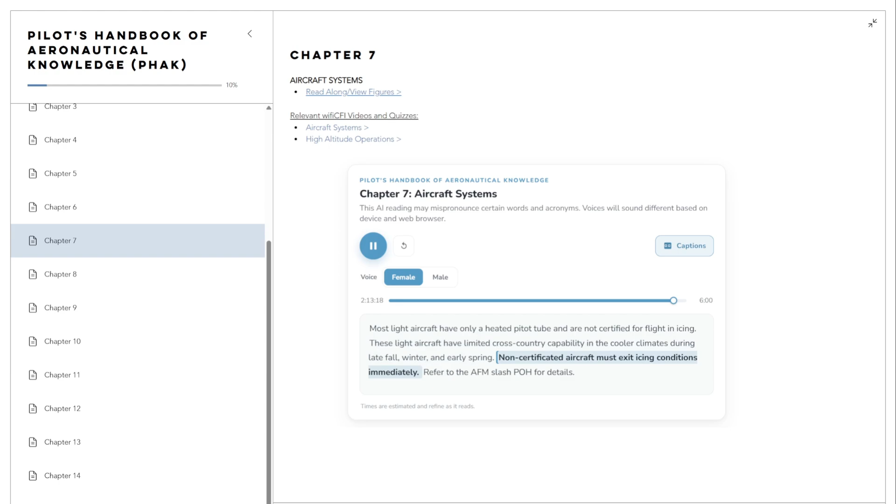Most light aircraft have only a heated pitot tube and are not certified for flight in icing. These light aircraft have limited cross-country capability in the cooler climates during late fall, winter, and early spring. Non-certificated aircraft must exit icing conditions immediately. Refer to the AFM/POH for details.

Airfoil anti-ice and de-ice. Inflatable de-icing boots consist of a rubber sheet bonded to the leading edge of the airfoil. When ice builds up on the leading edge, an engine-driven pneumatic pump inflates the rubber boots. Many turboprop aircraft divert engine bleed air to the wing to inflate the rubber boots. Upon inflation, the ice is cracked and should fall off the leading edge of the wing. De-icing boots are controlled from the flight deck by a switch and can be operated in a single cycle or allowed to cycle at automatic, timed intervals.

In the past, it was believed that if the boots were cycled too soon after encountering ice, the ice layer would expand instead of breaking off, resulting in a condition referred to as ice bridging. Consequently, subsequent de-ice boot cycles would be ineffective at removing the ice buildup.

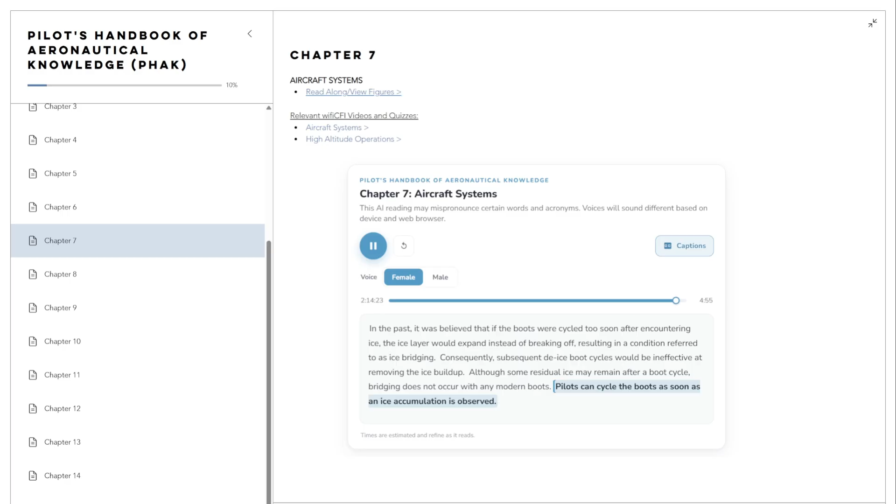Although some residual ice may remain after a boot cycle, bridging does not occur with any modern boots. Pilots can cycle the boots as soon as an ice accumulation is observed. Many de-icing boot systems use the instrument system suction gauge and a pneumatic pressure gauge to indicate proper boot operation. These gauges have range markings that indicate the operating limits for boot operation. Some systems may also incorporate an annunciator light to indicate proper boot operation.

Proper maintenance and care of de-icing boots are important for continued operation of this system. They need to be carefully inspected during pre-flight. Another type of leading-edge protection is the thermal anti-ice system. Heat provides one of the most effective methods for preventing ice accumulation on an airfoil. High-performance turbine aircraft often direct hot air from the compressor section of the engine to the leading-edge surfaces. The hot air heats the leading-edge surfaces sufficiently to prevent the formation of ice.

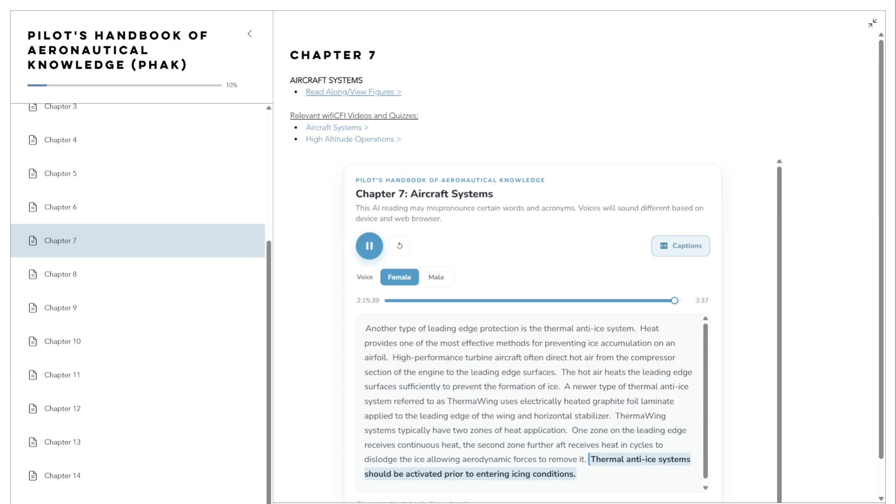A newer type of thermal anti-ice system referred to as ThermaWing uses electrically heated graphite foil laminate applied to the leading edge of the wing and horizontal stabilizer. ThermaWing systems typically have two zones of heat application. One zone on the leading edge receives continuous heat; the second zone further aft receives heat in cycles to dislodge the ice, allowing aerodynamic forces to remove it. Thermal anti-ice systems should be activated prior to entering icing conditions.

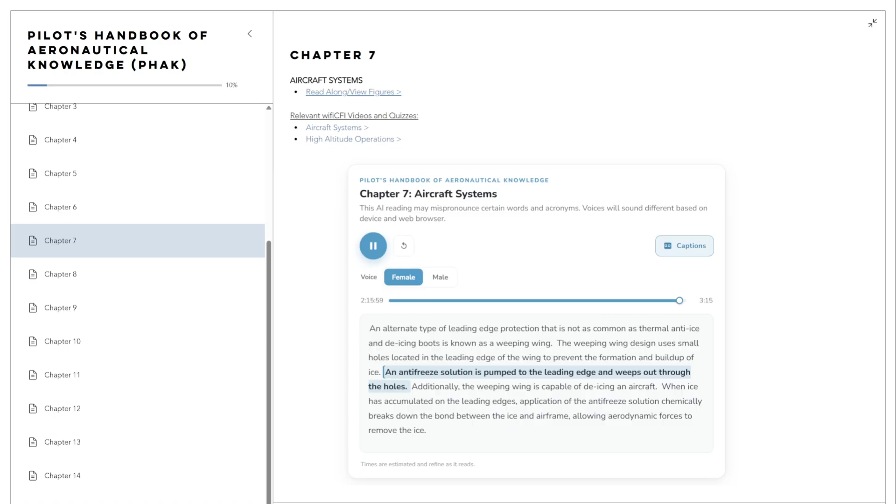An alternate type of leading-edge protection that is not as common as thermal anti-ice and de-icing boots is known as a weeping wing. The weeping wing design uses small holes located in the leading edge of the wing to prevent the formation and buildup of ice. An antifreeze solution is pumped to the leading edge and weeps out through the holes. Additionally, the weeping wing is capable of de-icing an aircraft. When ice has accumulated on the leading edges, application of the antifreeze solution chemically breaks down the bond between the ice and airframe, allowing aerodynamic forces to remove the ice.

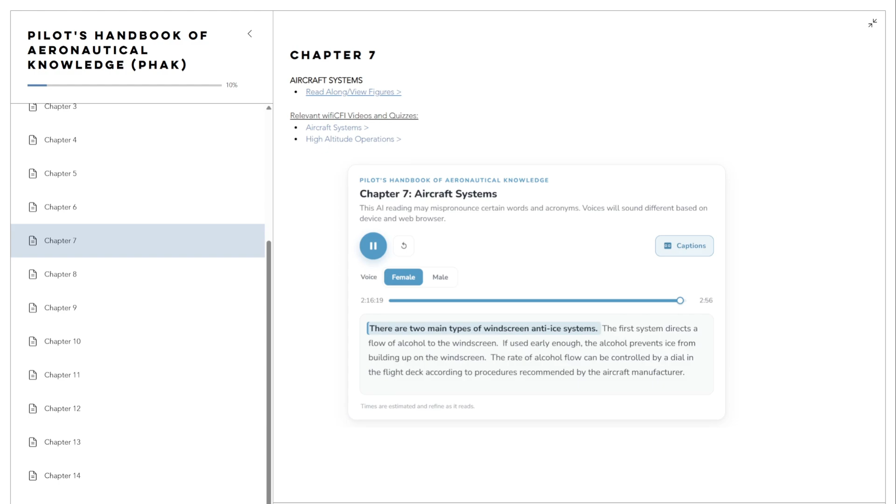Windscreen anti-ice. There are two main types of windscreen anti-ice systems. The first system directs a flow of alcohol to the windscreen. If used early enough, the alcohol prevents ice from building up on the windscreen. The rate of alcohol flow can be controlled by a dial in the flight deck according to procedures recommended by the aircraft manufacturer. Another effective method of anti-icing equipment is the electric heating method.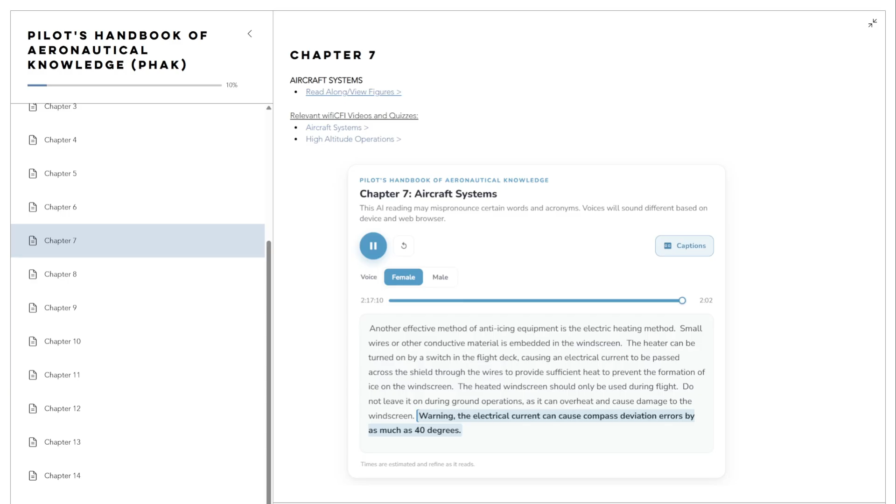Small wires or other conductive material is embedded in the windscreen. The heater can be turned on by a switch in the flight deck, causing an electrical current to be passed across the shield through the wires to provide sufficient heat to prevent the formation of ice on the windscreen. The heated windscreen should only be used during flight. Do not leave it on during ground operations, as it can overheat and cause damage to the windscreen. Warning: the electrical current can cause compass deviation errors by as much as 40 degrees.

Propeller anti-ice. Propellers are protected from icing by the use of alcohol or electrically heated elements. Some propellers are equipped with a discharge nozzle that is pointed toward the root of the blade. Alcohol is discharged from the nozzles and centrifugal force drives the alcohol down the leading edge of the blade. The boots are also grooved to help direct the flow of alcohol. This prevents ice from forming on the leading edge of the propeller.

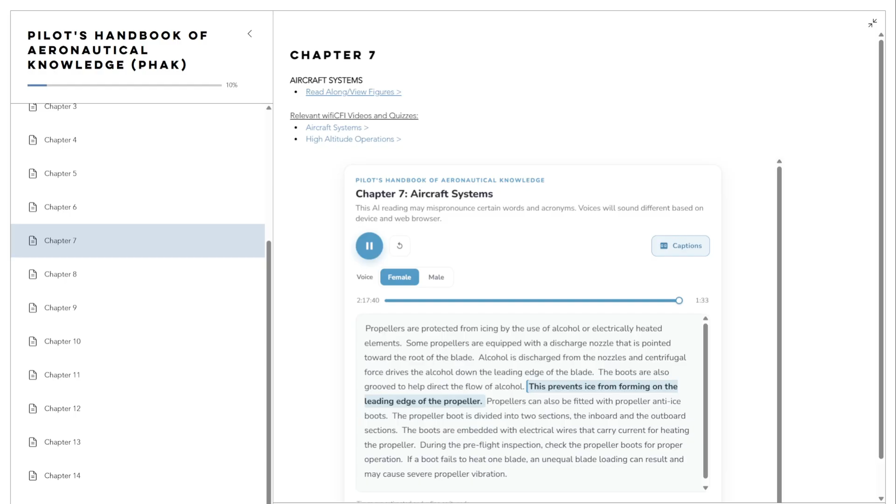Propellers can also be fitted with propeller anti-ice boots. The propeller boot is divided into two sections, the inboard and the outboard sections. The boots are embedded with electrical wires that carry current for heating the propeller. During the pre-flight inspection, check the propeller boots for proper operation. If a boot fails to heat one blade, an unequal blade loading can result and may cause severe propeller vibration.

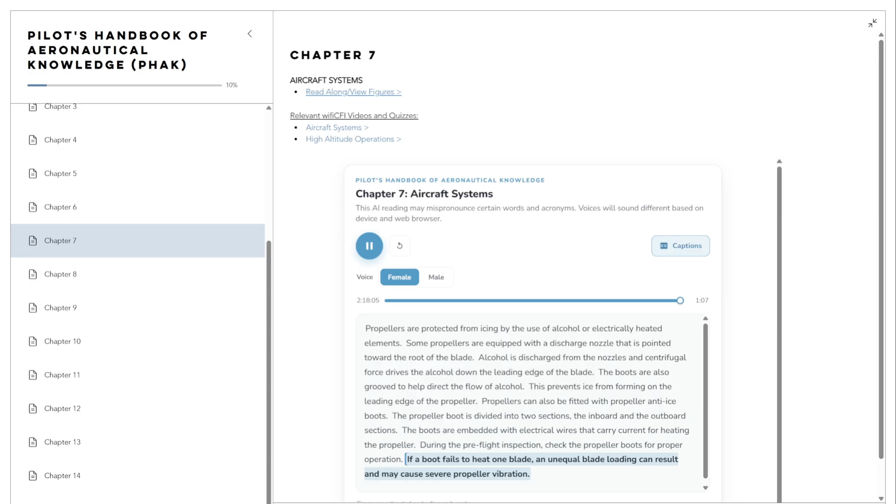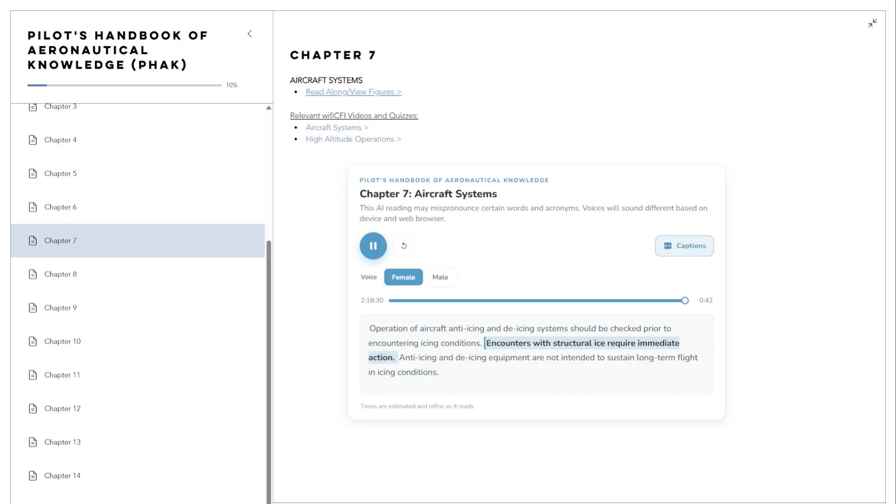Other anti-ice and de-ice systems. Pitot and static ports, fuel vents, stall warning sensors, and other optional equipment may be heated by electrical elements. Operational checks of the electrically heated systems are to be checked in accordance with the AFM/POH. Operation of aircraft anti-icing and de-icing systems should be checked prior to encountering icing conditions. Encounters with structural ice require immediate action. Anti-icing and de-icing equipment are not intended to sustain long-term flight in icing conditions.

Chapter Summary. All aircraft have a requirement for essential systems such as the engine, propeller, induction, ignition systems, as well as the fuel, lubrication, cooling, electrical, landing gear, and environmental control systems to support flight. Understanding the aircraft systems of the aircraft being flown is critical to its safe operation and proper maintenance. Consult the AFM/POH for specific information pertaining to the aircraft being flown. Various manufacturer and owners group websites can also be a valuable source of additional information.